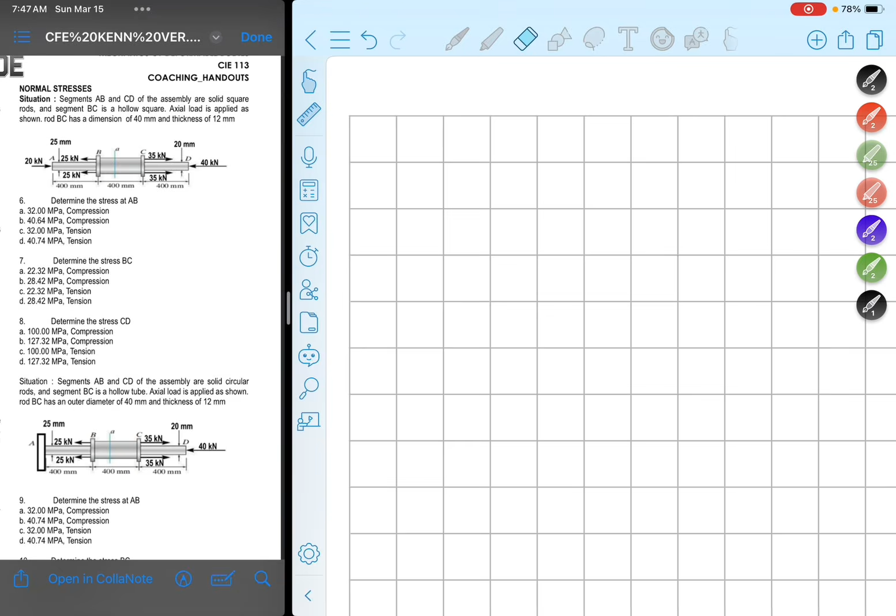Okay, basahin natin. Segments AB and CD of the assembly are square solid rods and segment BC is a hollow square. Axial load is applied as shown. Rod BC has a dimension of 40 mm and thickness of 12 mm. Pagkayari mo magbasa ng tanong, ito ang tip ko sa inyo.

Pagkayari nyo magbasa ng situation problems, yung binasa ko kanina, the first thing that you're going to do is basahin mo muna yung tanong. Yung mga tatlong tanong, nakasunod yung situation na yun, kasi para alam mo kung paano siya i-approach. Time saving kasi, if alam mo agad kung ano hinahanap, hindi yung kung ano-ano pa yung gagawin mo, di ba?

May situational problems, guys, na minsan nandun na yung sagot, hindi mo binasa yung tanong, kaya hindi mo alam kaya ginawa mo muna kung ano-ano muna. Hindi ko naman pala kailangan ng ganyan, hindi ko naman pala kailangan ng ganito, bakit ko siya hinanap? Kasi hindi mo alam kung ano ba yung totoong hinahanap dun sa problem.

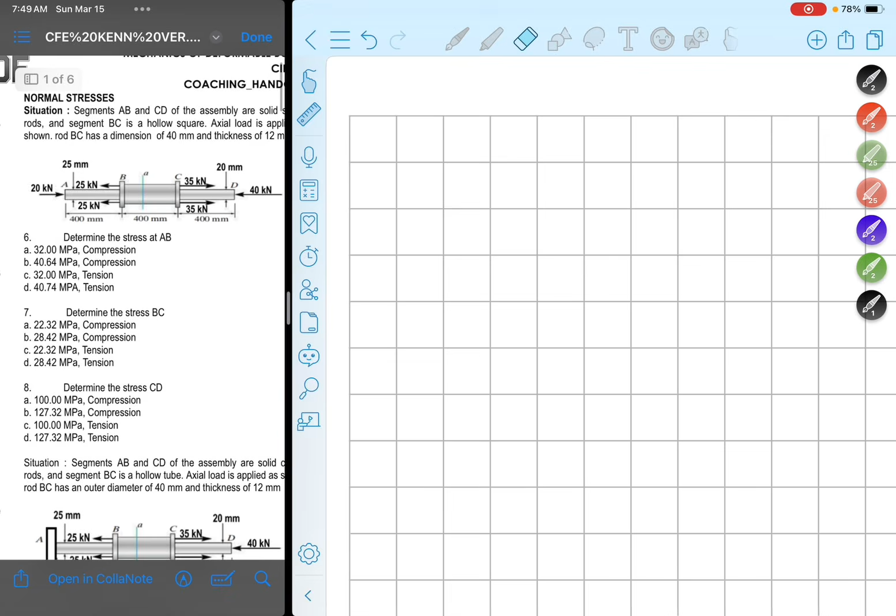So after mong basa ng situation, basahin mo yung problem. Ang sabi, determine the stress at AB. Determine the stress at BC. And determine the stress at CD. So technically guys, hinahanap sa atin yung stress.

Okay, for situation number 1, hinahanap sa atin yung stress. Generally, ano ba yung formula ng stress? Tingnan mo muna, balik ka dun sa situation. Ang sabi dyan, axial load is applied. Ibig sabihin ng axial load guys, that the load is applied towards or perpendicular to the cross-sectional area. Ibig sabihin, normal stress yung hinahanap natin. Kung ganun pala, if normal stress yung hinahanap, ano yung formula for the normal stress? Simply, normal stress is equal to force over the area.

At kapag gaganyan, hanapin nyo muna yung mga parameters. Ano yung P? Diba force yun? Ano yung A? Yung area. Mamili ka, isipin mo muna yung dalawa, siguro force muna.

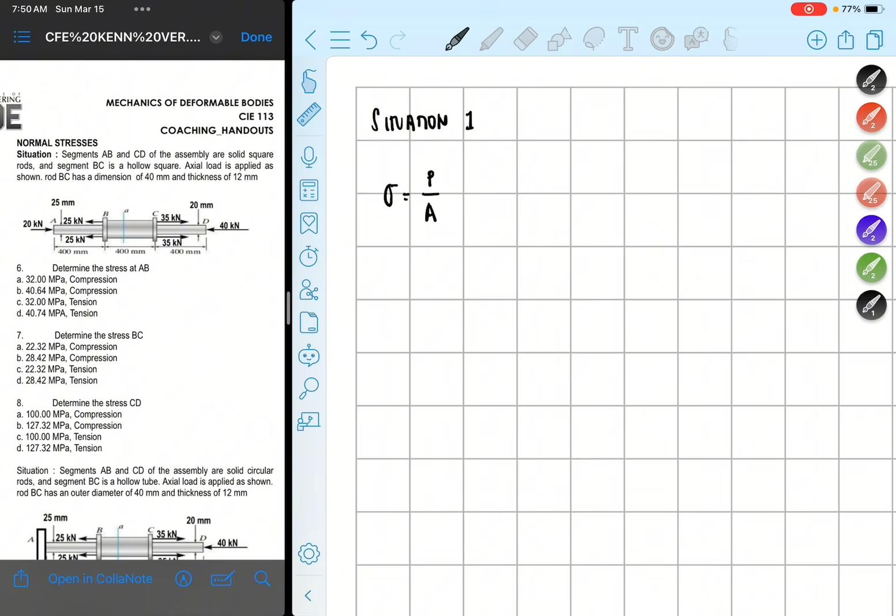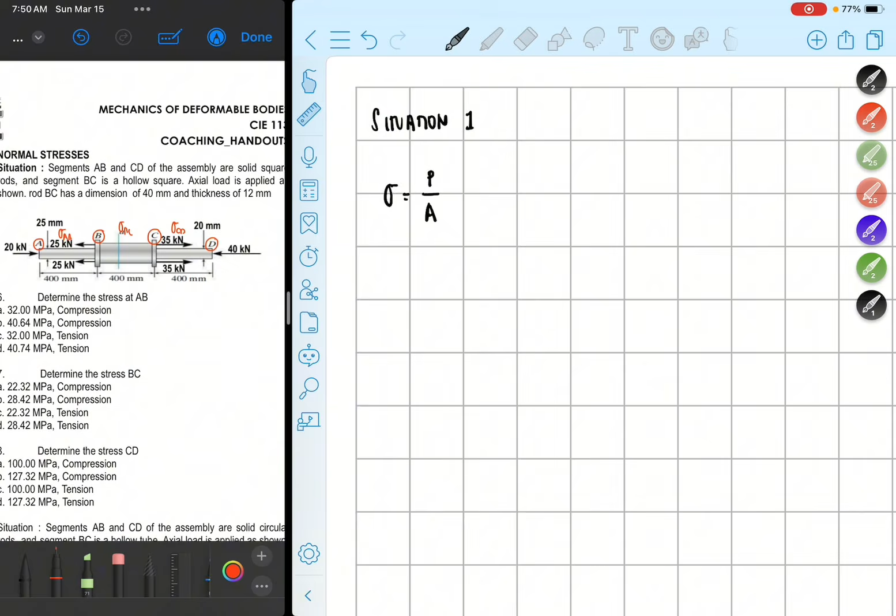In this case, hinahanap sa atin yung segment AB, segment BC, and for the last one, segment CD. So technically, yung stress dito stress AB, dito stress BC, and yung pinakadulo is stress CD. Ibig sabihin, kailangan mo yung force AB at saka yung area AB. Dito naman, kailangan mo yung force BC at saka area BC. At para dito naman, kailangan mo yung force CD at saka area CD.

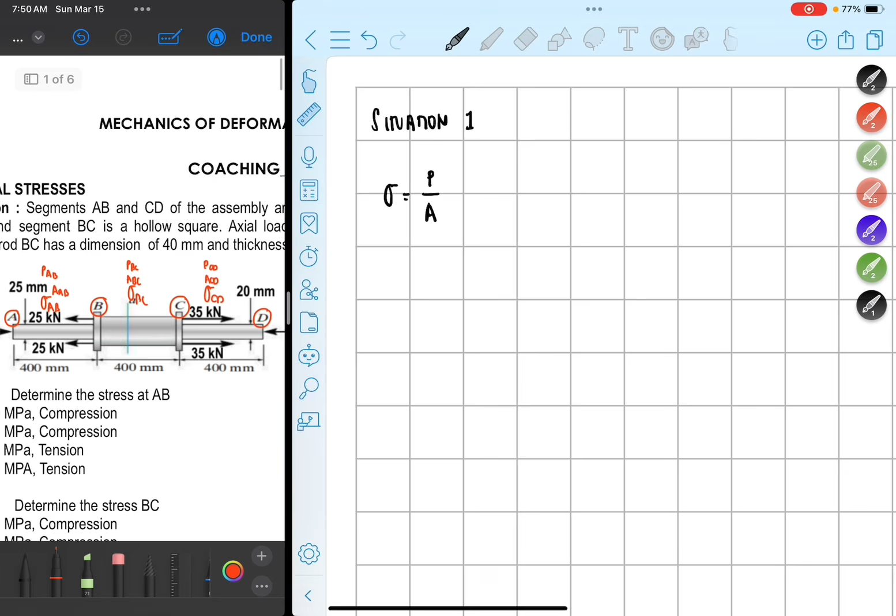So in this case guys, yun yung mga kailangan mong hanapin. Okay, so paano ba natin mapapalitaw yung force AB muna? For example, we're going to discuss we're going to get the forces muna. Pag forces guys yung hinahanap, di ba, those forces are internal forces. Meaning, hindi yung sisingaw, kung hindi, puputulin. Okay? In this case guys, the most efficient way to identify the forces is by cutting the cross section.

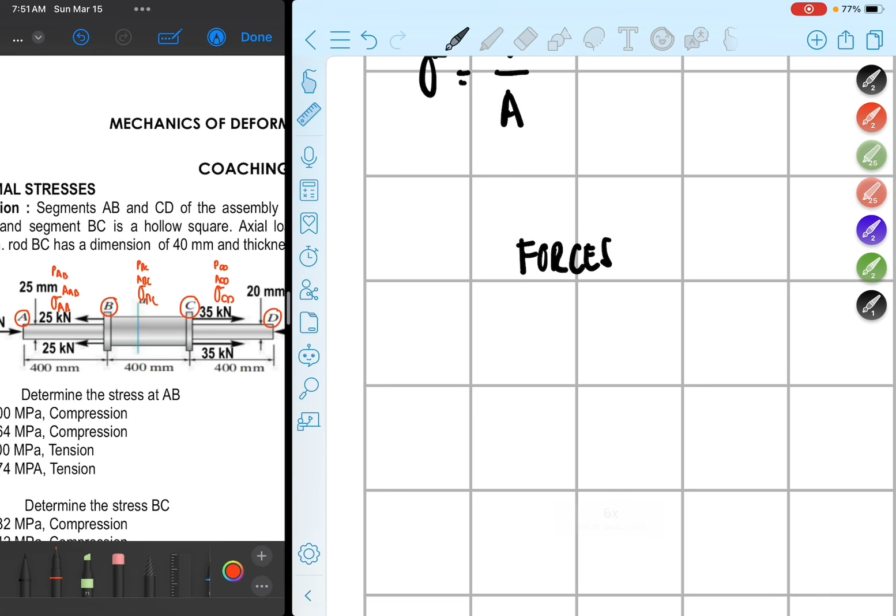Okay, so yun. Ibig sabihin, kailangan nating i-cut yung cross section natin. So ibig sabihin, need natin iputulin. Okay, so ibig sabihin, yung for segment AB, kailangan natin siyang putulin. Okay, kung puputulin natin yan, hindi ba this will be your segment AB. Okay, so this will be your segment AB. Putol na yan. Okay, putol na yung cross section natin na yan.

Kung mapapansin nyo, for segment AB, meron tayong, pag pinutol mo tong portion na to, di ba ito ipuputulin mo dyan, ito yung ginawa ko. Ayan, pinutol mo yan, ibig sabihin ng force lang napapasok dyan is, wait lang. Di ba, ang force lang napapasok dyan is ito, which is 20 kilonewton.

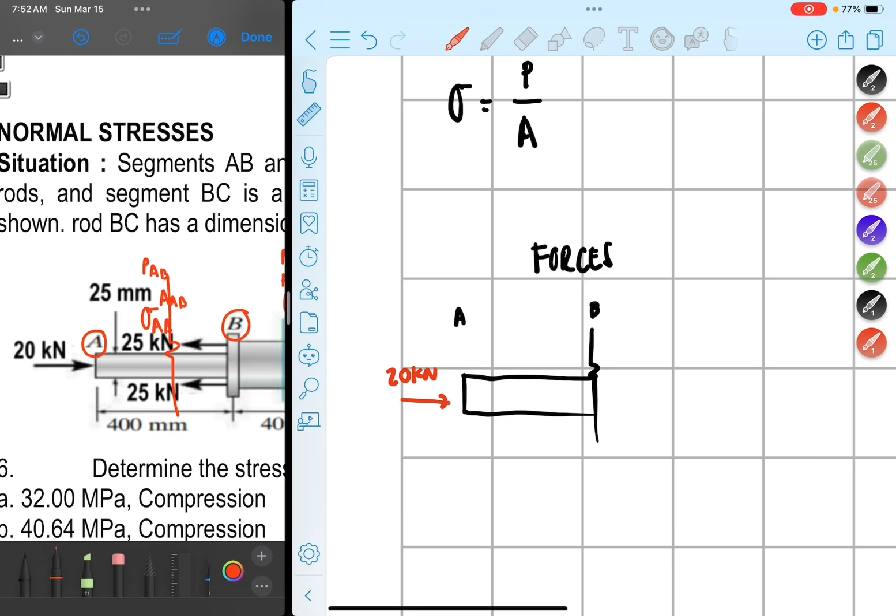Ngayon, para makuha mo yung force AB, okay, by the way guys, yung force AB na sinasabi ko dito, okay, yung force BC natin, okay, yung force BC natin dito is kung ano ba yung isisingaw nung pagkakaputol mo. Yun kasi guys yung internal reaction to the external forces. Meaning, kung meron kang 20 kilonewton doon, hindi mo na siguro kailangan mag-assume kung ano ba yung direction ng internal force. Diba, in every action, there's an equal and opposite reaction para dun sa may forces ng mga reactions natin.

So, I believe, pag ganyan yung ating PAB. Okay? Dito ko na lang gagawin siguro yon, but taking the summation of forces along the x-axis naman yan, di ba? Which is equal to 0. 0 to the right positive tayo dito. 0 is equal to 20 minus PAB. So technically, yung PAB natin is equal to 20 kilonewton.

So make sure guys na i-indicate yung unit kasi may mga times na kailangan natin convert yan. Pagka bumubuo tayo ng equation, meron instances na parang, kumbaga, may mga instances na meron tayong internal forces pa. So, basta mamaya, siguro meron ba tayo example doon? I think meron naman. O kung wala, siguro idadagdag ko na lang siya. But yun, wag yun lang basta kakalimutan yung mga units natin. So, ibig sabihin, the force AB is 20 kilonewton.

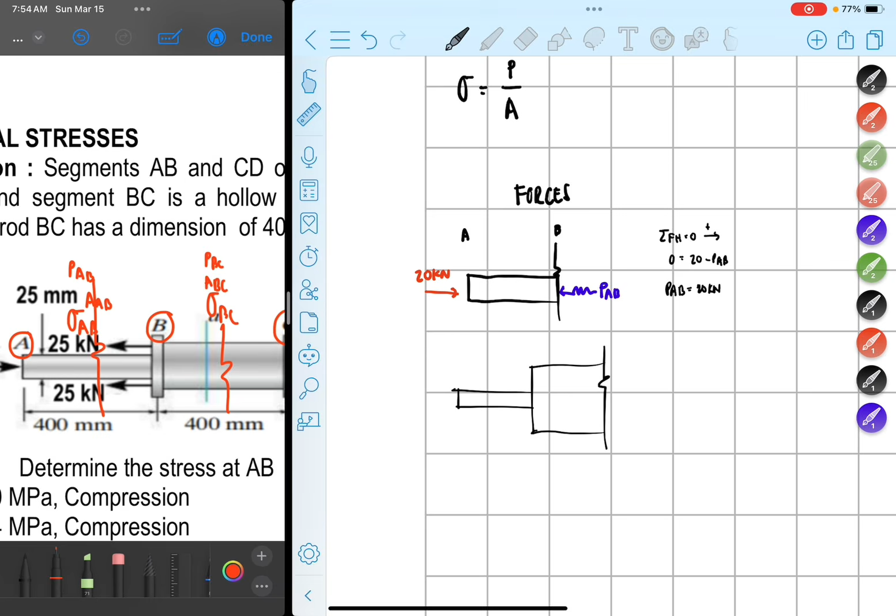So, wag muna natin yung siguro i-diretso na natin ng segment BC. Kung puputulin mo naman itong segment BC, di ba ganyan yan? Okay? Putulin na natin siya. So, ulitin ko lang. Ito buo na to. Take note guys, buo na yan. Ito naman yung puputulin natin. Okay? So, technically, this will be your A, this will be your B, and this will be your C.

Okay? So, ngayon, isulat mo ulit yung mga forces. Okay? In this case, meron tayo dito. In this case, we have 20 kilonewton. And then, meron tayong 25 kilonewton na pumupul dito. Okay, this is 25 kN. And then, we have 25 kN.

At lagi nyo guys tatandaan na yung 25 tsaka 25 kilonewton na yan is applied along or across the cross section. Pero wala siya sa gitna. Meaning nakapabilog kasi yung 25 na yan. O kaya naman, dalawang point dito sa may cross section natin dito, diyan ina-apply yung 25 kilonewton.

And take note guys, that yung 25 kilonewton na yan is hindi yan, kumbaga, hindi pa yan yung resultant natin na force na nag-a-act sa cross section na yan. Tama? Kasi guys, kailangan along this line of action bago ka magkaroon ng summation ng forces mo. Tama? So, di ba nagsasummation tayo ng forces? So, hindi mo pwedeng pag-plusin yung dalawa na yan unless kunin mo yung resultant nung dalawang force natin. In this case, guys, okay? In this case, guys, okay? In this case, kukunin mo yung resultant nung dalawa na yan.

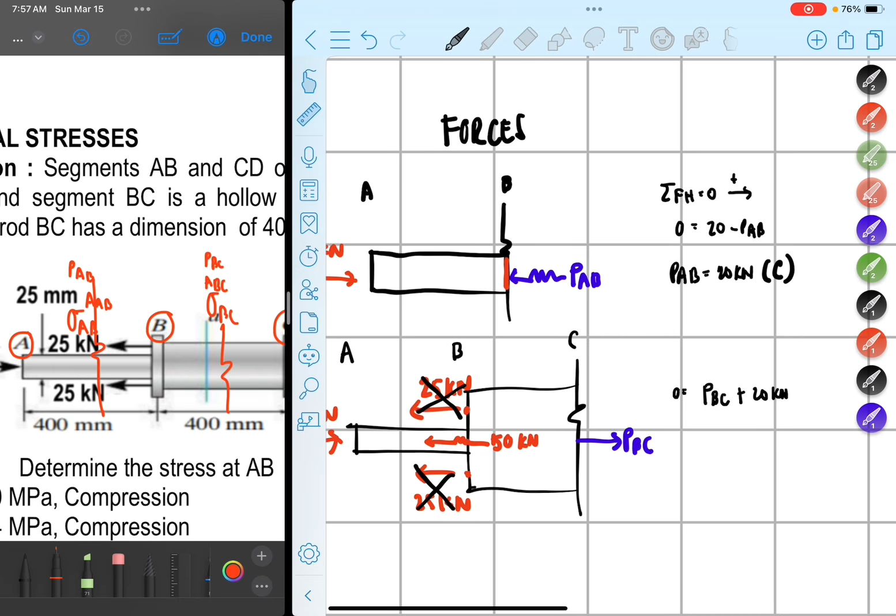So taking the summation of forces, let's go straight. We have 0 equals PBC, to the right is positive, plus 20 kN, minus 50 kN. So in this case, our PBC equals 30 kN.

But make sure guys, that 30 kN, you know what direction it is. Is it tension or compression? If you look, this is our cross-sectional area. Our force is away from the cross-sectional area. Therefore, this is tension, meaning it pulls that portion.

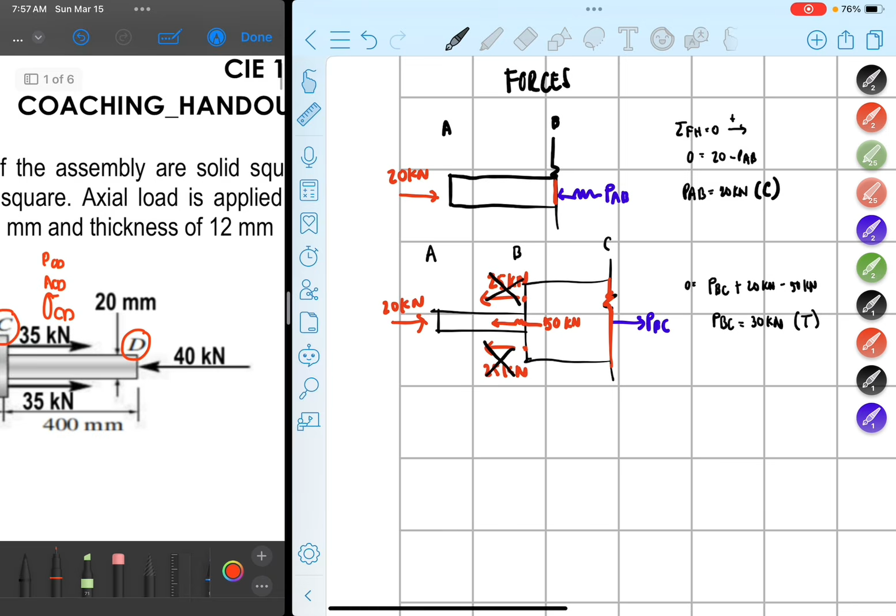Our cutting plane is like this. Okay, so this is D, this is C. If you have 40 kN here, if you have 40 kN there, what now is the internal force PCD, to equal that 40 kN.

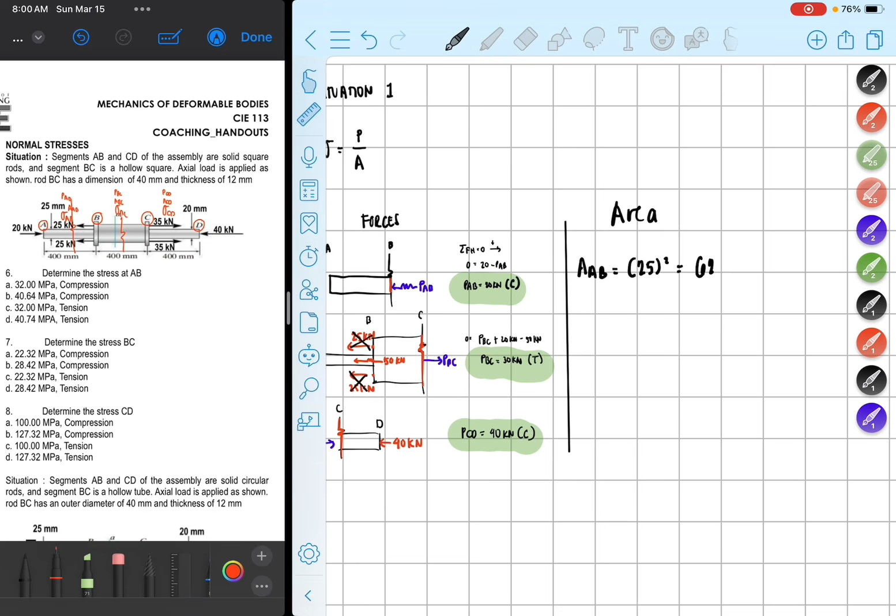Since we're still on the solid squares, because it says solid squares for AB and CD. So here we go to the area of CD. This equals 20 squared, which equals 400. Okay, so we have 400.

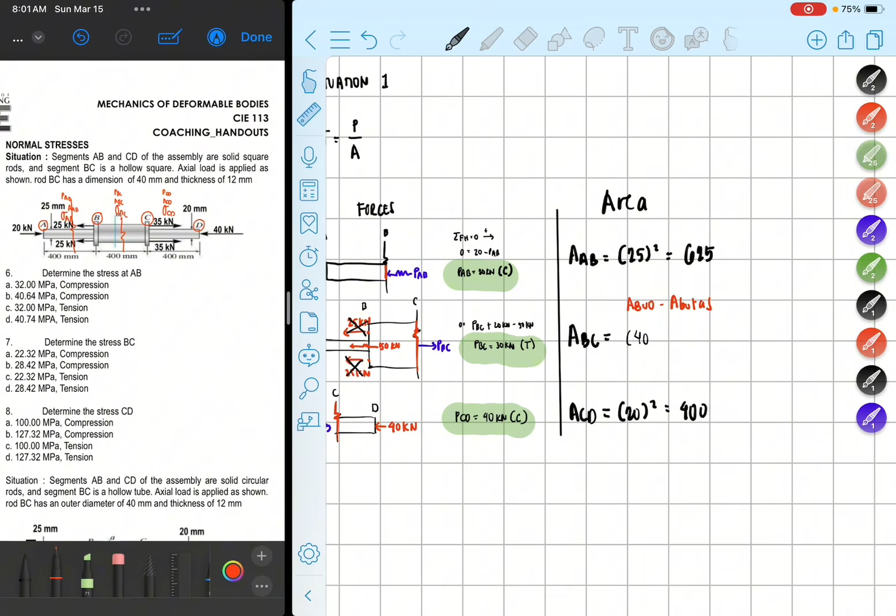So, the thickness is 12. That means 12 on this side and 12 on this side too. It works both ways since this is tubular, a tube. So if this is 40, how much is the inner portion? 40 minus 12 on the left, minus 12 again on the right, gives us 16. So the inner dimension is 16, the outer dimension is 40. Since it's square, it works both sides.

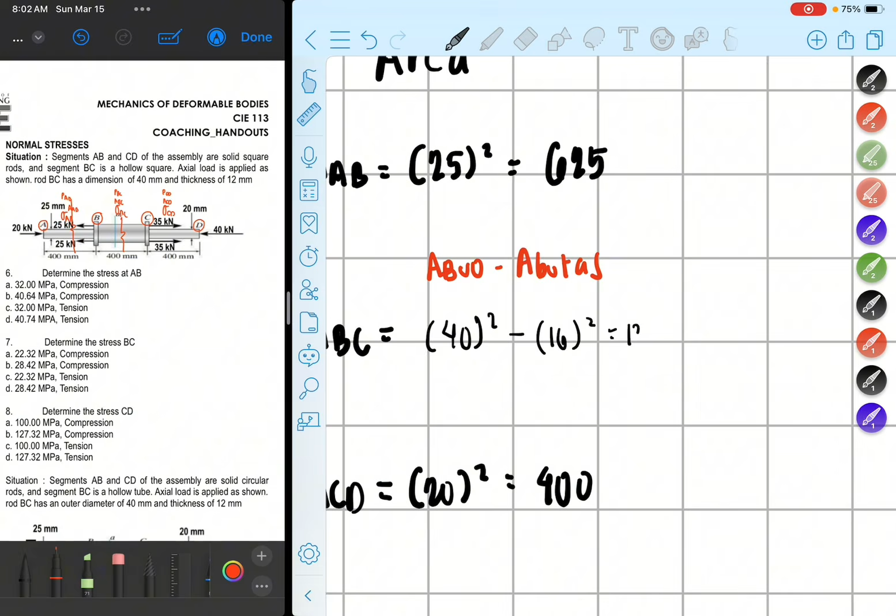So this is 16 square. We have 40 square minus 16 square. This equals 1344.

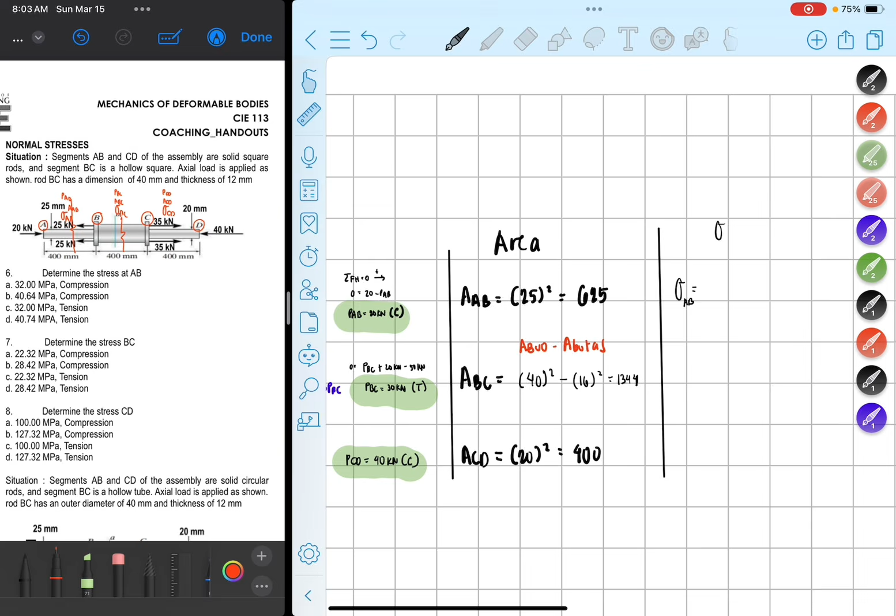Let's deduct for the stresses. For stress AB, you have 20 kN compression force at 625 area. So this is equal to 20 times 10 raised to 3, converting kilonewton to Newton, since our choices are in MPa, Newton per millimeter square. That's another way for you to identify if what we're doing is correct.

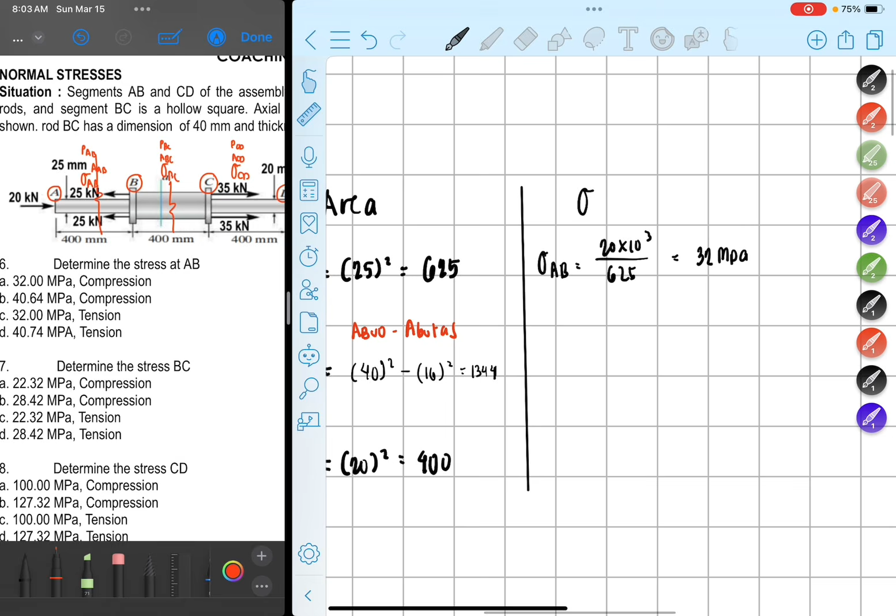So, AB is equal to 20 times 10 raised to 3 over the area of 625. How much is that? 20 times 10 raised to 3 over 625, giving us 32 MPa. The first thing your eye sees, unfortunately, is letter C, which is 32 MPa tension.

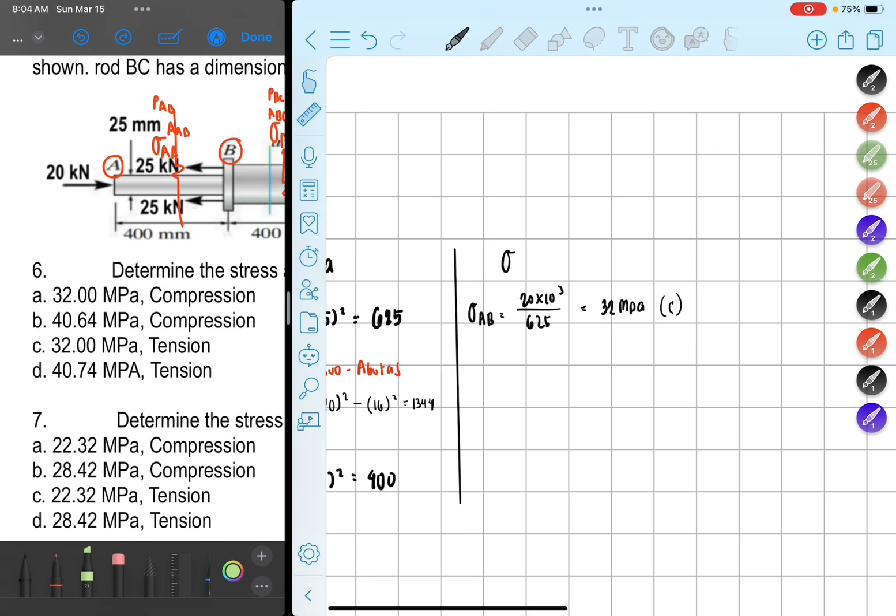So this is BC. What's the force for BC? You have 30 times 10 raised to 3. What's the area? 1344. This equals 30 times 10 raised to 3 over 1344, which equals 22.32 MPa. And check again, this is tension.

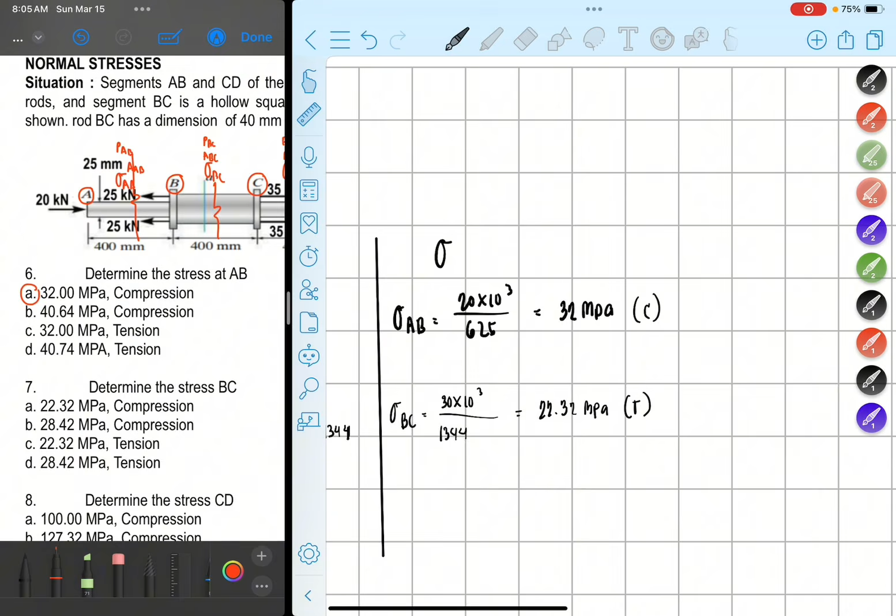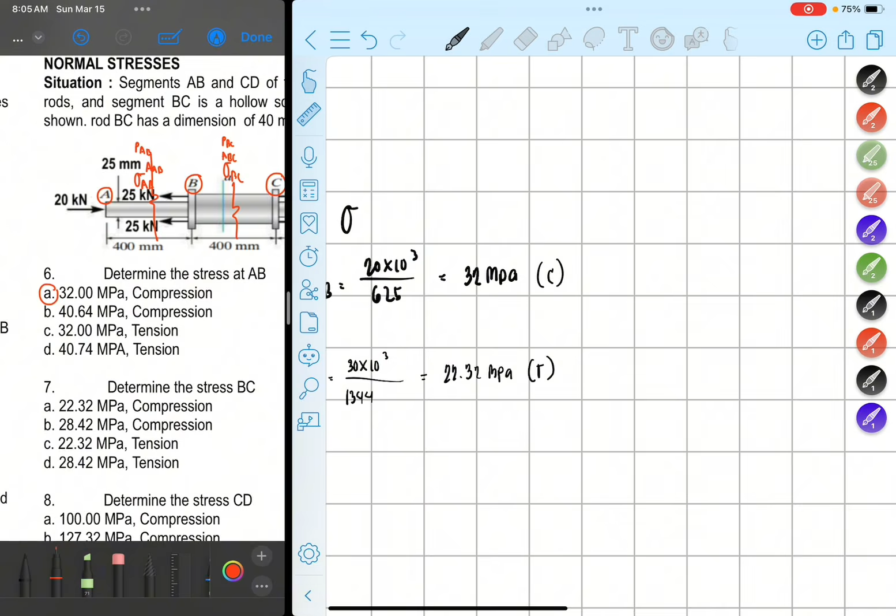It says hollow square, but let's try it anyway. By the way, the answer for number 7 is 22.32 tension, which is letter C. Now, what I considered was circular.

If it's circular, if this is 40, this is 16, right? So this is 16. The area I computed, the stress, since we have 30 times 10 raised to 3 here, the area, since it's circular, is pi outer diameter square over 4 minus pi inner diameter square over 4. Compute that, guys.

Let's compute. We have 30 times 10 raised to 3 over pi times 40 square over 4 minus pi times 16 square over 4. The result is 28.42. If that's what you thought of first, you'd be so hyped to circle letter D, 28.42 tension, as your answer.

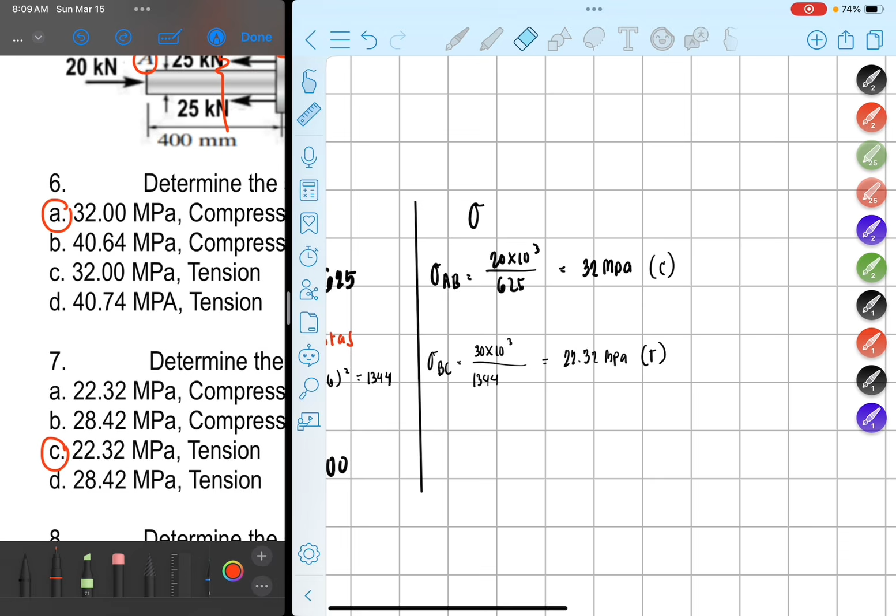So in this case, ang sagot is 22.32 MPa. That's the correct answer. Anyway, next is for letter CD.

Okay, for the stress ng CD, this is equal to, we have 40 times 10 raised to 3. And we have 400. So this is equal to 400 times 10 raised to 3 over 400. By the way, kaya ako siya times 10 raised to 3. It is because, wait lang - 400 niya, sorry that's 40 lang pala. 40 times 10 raised to 3 over 400. So we have 100 MPa.

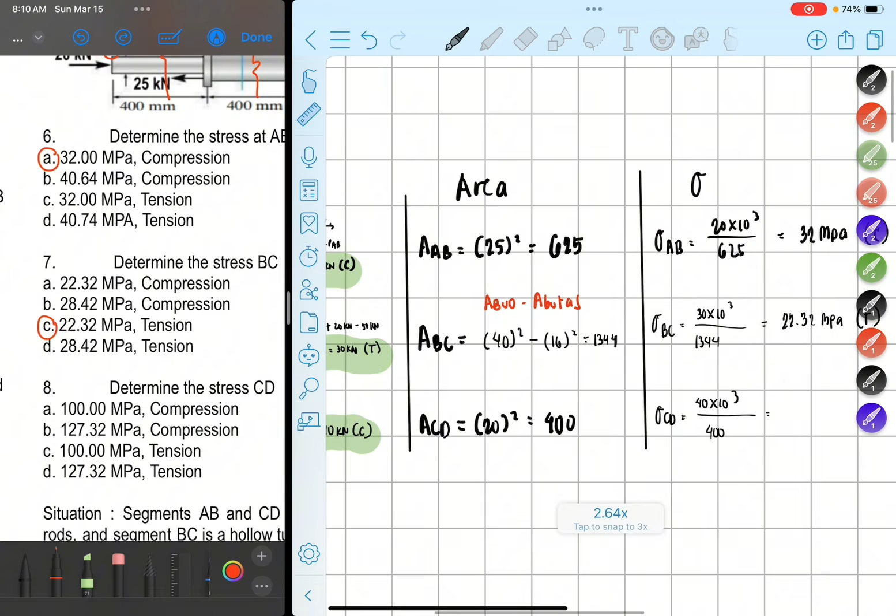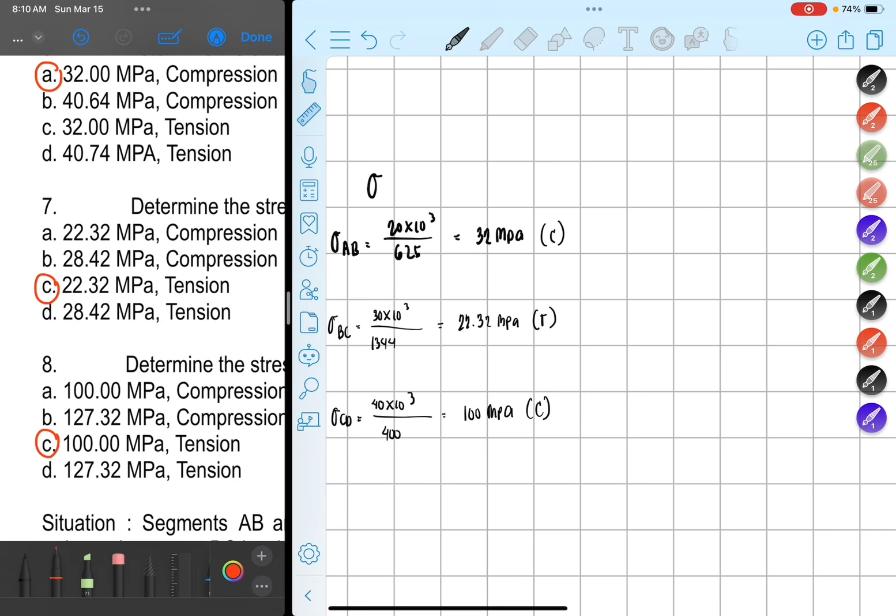By the way, this is compression ulit, so titingnan mo compression yan. Ang sagot natin for this one is 100 MPa tension, letter C - 100 MPa tension, letter C. Sorry, namali pa, 100 MPa compression pala. Okay, yan sagot, 32 MPa compression.

Bago ka mag-proceed sa next problem, check mo ulit yung sagot mo. You have 32 MPa compression, 22.32 MPa tension, at 100 MPa compression. So in this case guys, hindi ka na mai-stress kung tama ba yung nasulat mo, nabilugan mo, or na-shade mo etc. Pwede ka na mag-proceed. So let's proceed to the next problem.

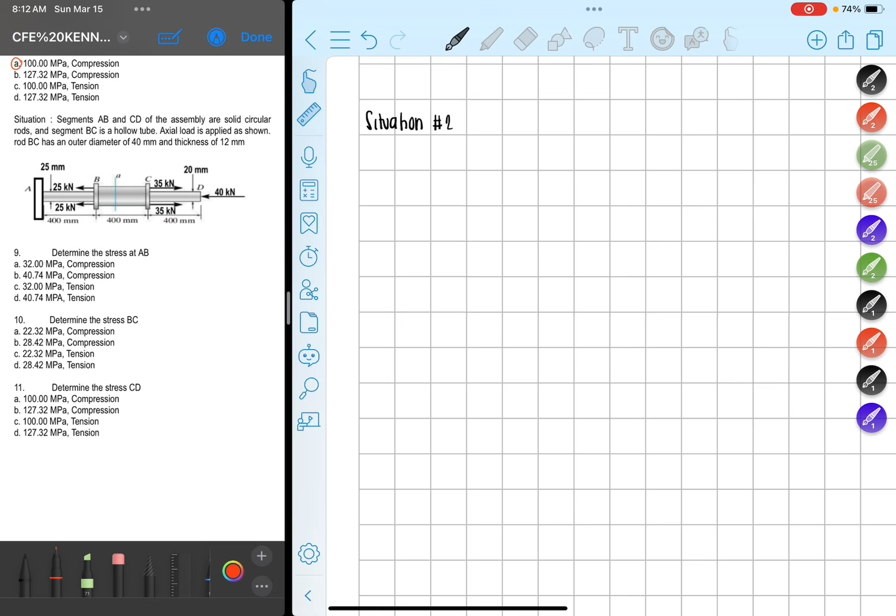So guys, starting here on, medyo tips na lang talaga ibibigay ko. Na-discuss ko naman kanina on how to paano mamili ng tamang mga values. So balik tayo dun sa analysis natin. Dito ko na lang siguro isusulat para hindi rin time consuming, mahaba masyado yung video natin. Ano pa ba isang way or method para ma-identify natin ng mabuti kung ano ba yung mga forces na included?

Pag nakakita kayo ng ganito, this is determinate naman. Kasi kung titingnan nyo, isa lang naman dito guys yung walang support. Pag ganun, ibig sabihin solvable pa rin siya by equilibrium equation. Pag nakakita kayo ng support na ganyan, technically kakalito na yan di ba? Unless simulan mo sa kanan, mag from right to left ka. In this case siguro mag from right to left na lang tayo. Pero kung hindi, sige gawin na nga natin left to right na lang, baka kasi yun dun kayo masanay.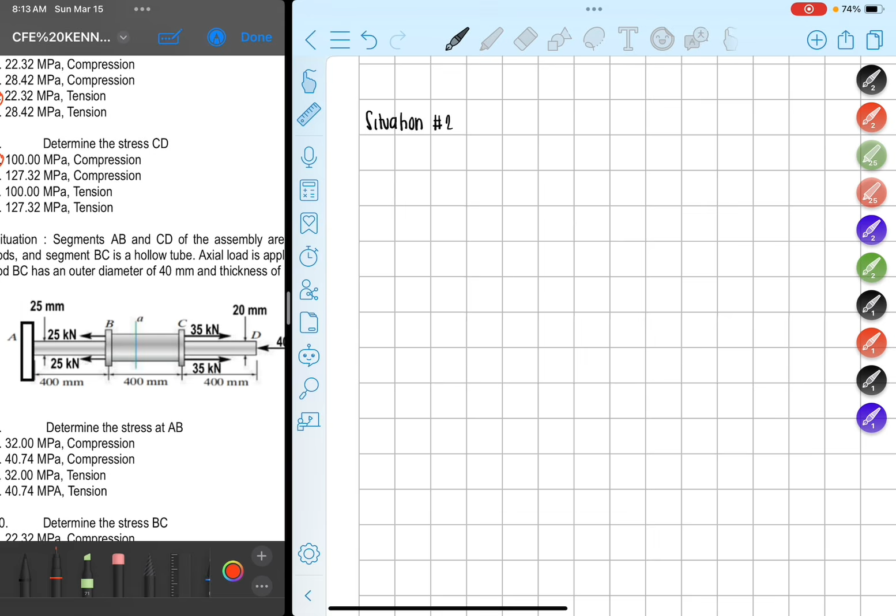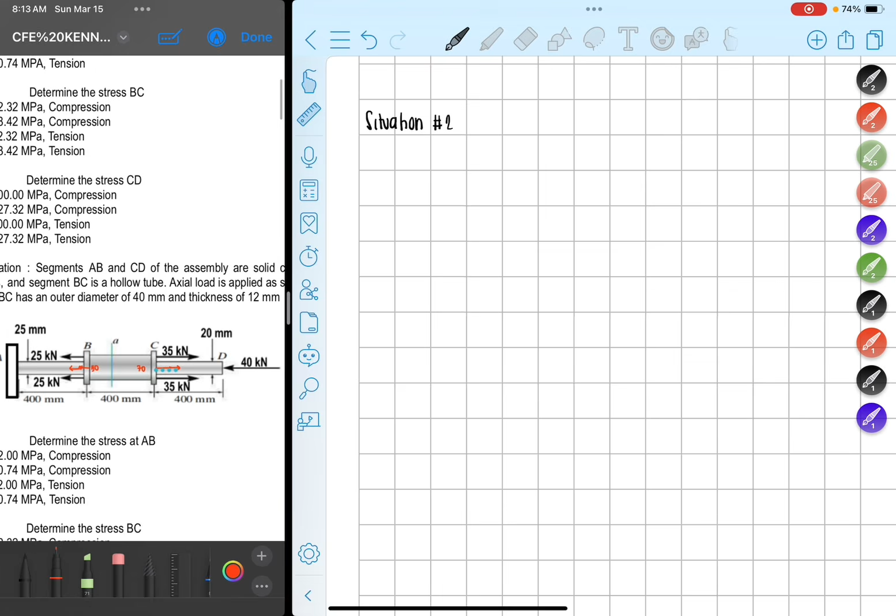Kung titingnan nyo mabuti, we have this steel rod. Ngayon yung A na yan, magkakaroon yan ng reaction kasi fixed yan. Ano ngayon yung magiging reaction ng A na yan? Ibig sabihin kailangan mong isolve yung reaction, dalawa. Kunin natin to guys - this is 50, sorry, yan this is 50. And this is 70. So meron kang 50 na pakaliwa, 70 na pakanan, at 40 na papunta ulit sa kaliwa. So tingnan mo mabuti para hindi ka na mag-summation forces.

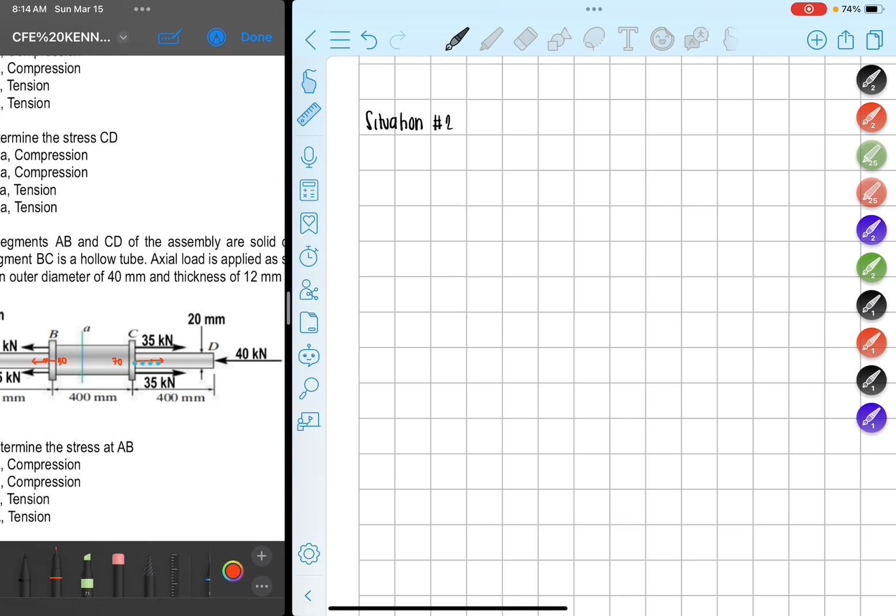Tingnan mo 40 plus 50, diba 90? Ano mas malaki, 90 o 70? Di 90. Ibig sabihin si 70 yung nangangailangan. So based on the direction ng 70, kailangan niya ng katulong papunta rin sa kanan. Tama? So kung papunta sa kanan yan, may undo dito.

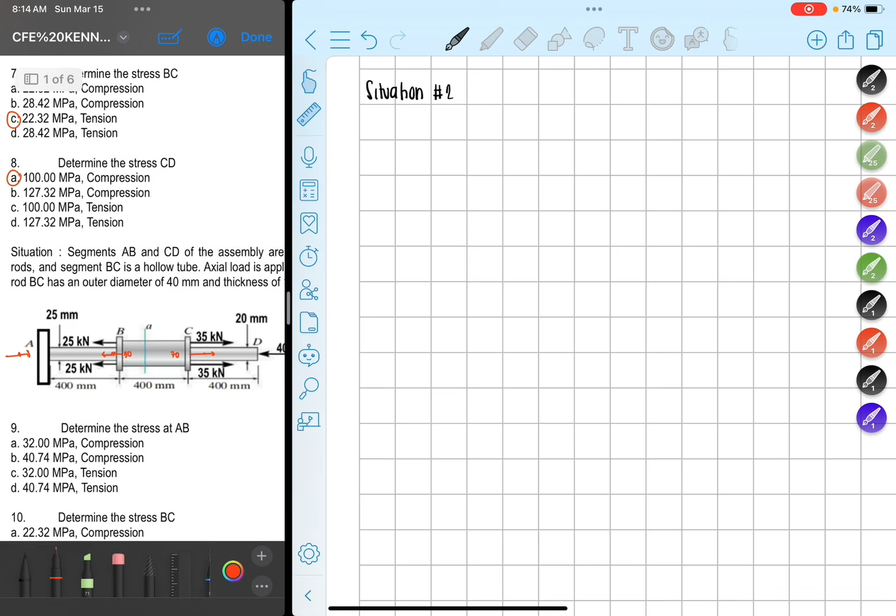Okay, kung papunta sa kanan, ito ngayon yung magnitude. Tama? So you have 90 na pakaliwa, you have 70 na pakanan. Ilan yung kailangan ni 70 para ma-equal niya yung 90? O di kailangan pa niya ng 20 kilonewton. So hindi mo na kailangan talaga mag-summation of forces horizontal.

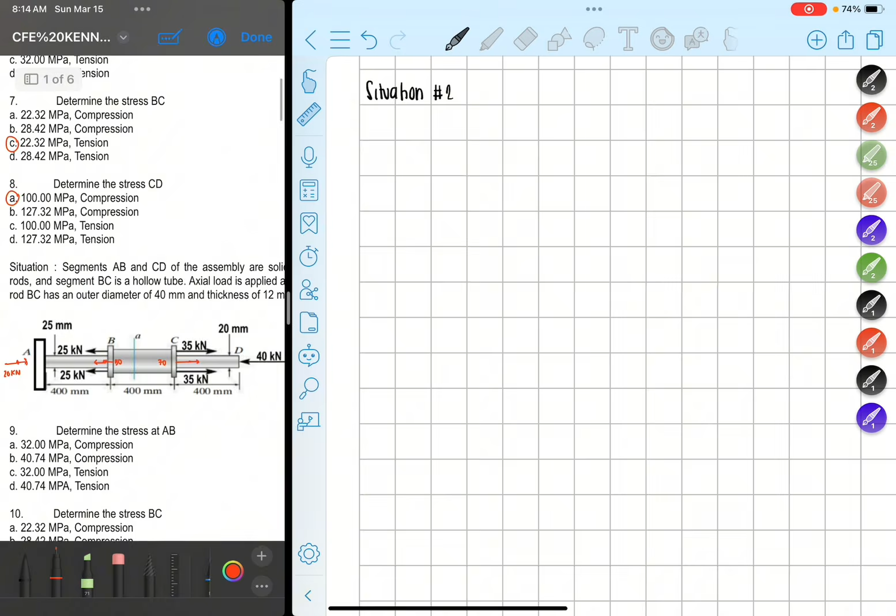Pero para mas ma-sure ka, gawin mo pa rin. Tingnan mo, para ma-sure, 20 plus 70 is equal to 90. Tama? And then 50 plus 40 is equal to 90 din. So ibig sabihin, in equilibrium na sila.

Ngayon hatiin mo. Now in this case, hatiin natin ito. Ganyan na lang siguro. Ngayon, ang force na kailangan mong i-consider dyan, eto lang, yung mga forces mo lang dun sa papuntang kaliwa kasi naka from left to right tayo, di ba? Saan ba yung dito? Okay, kasi undo.

Okay, ano yung mga forces na yun? Ibig sabihin, ang mga forces na yun, ayan lang titingnan mo. Pinutol mong ganyan. O ano yung forces ngayon doon? So meron ka lang 20 kilonewton. Anong direction? 20 kilonewton is papunta sa kanan. Therefore, ang kailangan mong 20 kilonewton ngayon for this segment AB ay ang punta sa kaliwa. So this is 20 kilonewton, sulat mo na lang din. This is compression.

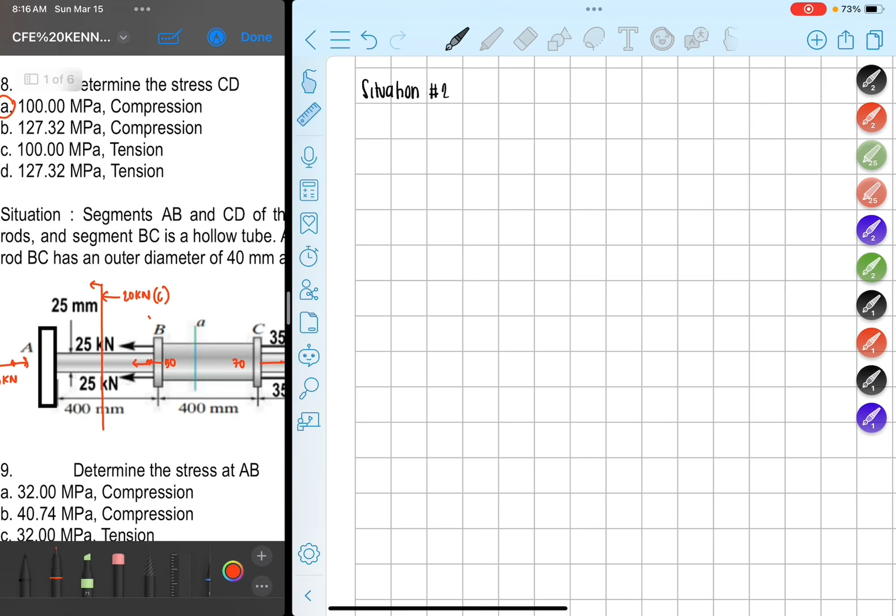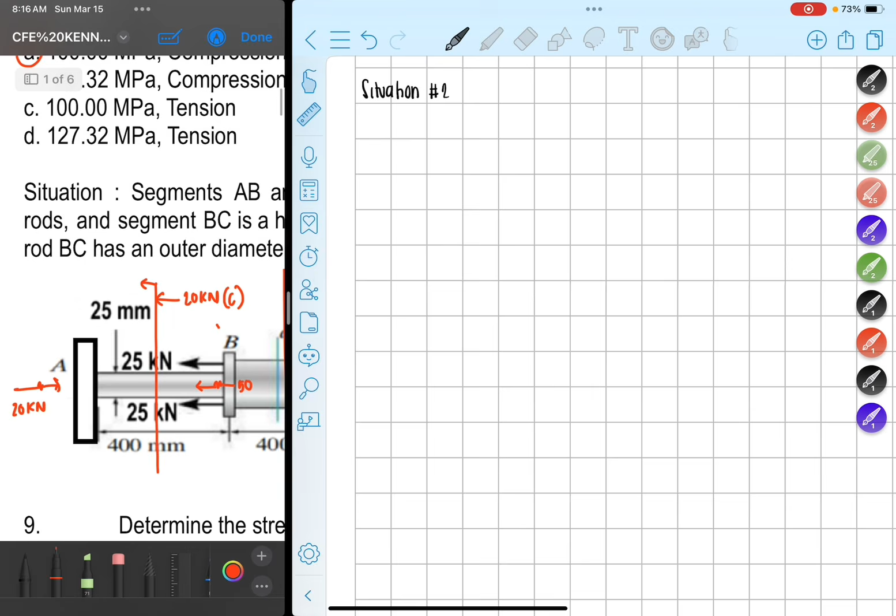Okay, next, hatiin naman natin ito. Ang mga forces na involved naman dito is yung ating 50 kilonewton tapos yung 20 kilonewton. 50 pakaliwa at 20 pakanan. Sino mas maliit? Yung pakanan. Ibig sabihin kailangan niya ng katulong. So kung 50 yan, ilan pa yung kailangan ni 20 para ma-equal si 50? There we have 30 kilonewton. In this case guys, away from the cross-sectional area, this is tension.

Okay, next, para sa last, hatiin natin ito ngayon. Sige, consider pa natin from left to right. Ano ngayon yung mga forces na involved doon? So in this case, ang forces na involved, ayan na yun. You have 20 kilonewton, 50 kilonewton, at saka 70 kilonewton. Meron kang 20 kilonewton pakanan, 50 kilonewton pakaliwa, at 70 kilonewton pakanan ulit.

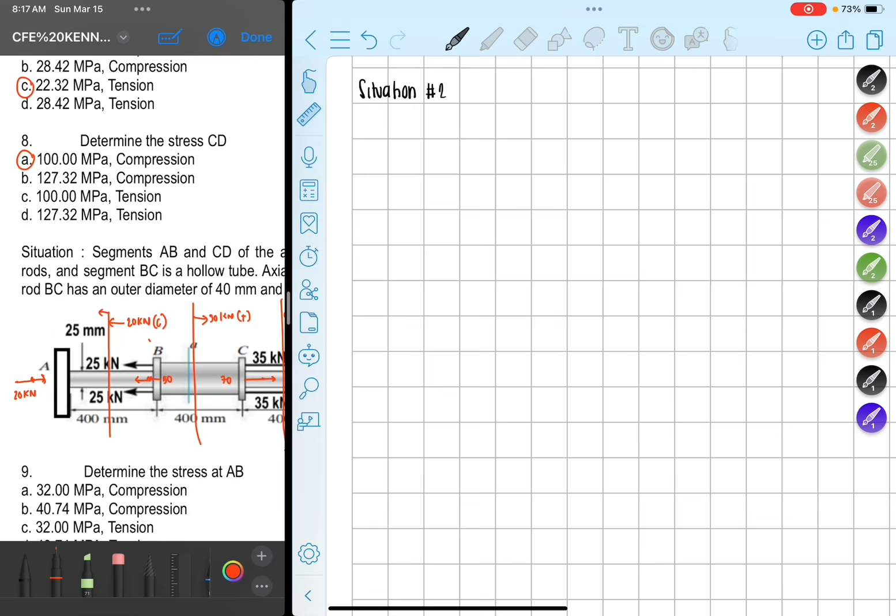Kung titingnan mo, 20 plus 70 na pakanan is 90. Tapos 50 na pakaliwa. Sino mas maliit? Si 50. Ilan pa kailangan ni 50 para ma-equal niya yung 90 na pakanan? Mas maliit siya, ibig sabihin siya yung nangangailangan ng tulong at kailangan ng same direction. Ilan yung magnitude na kailangan niya? 20 plus 70 na pakanan is 90. So ibig sabihin, kailangan pa ni 50 kilonewton ng katulong na pakaliwang 40 kilonewton. In this case, this is compression.

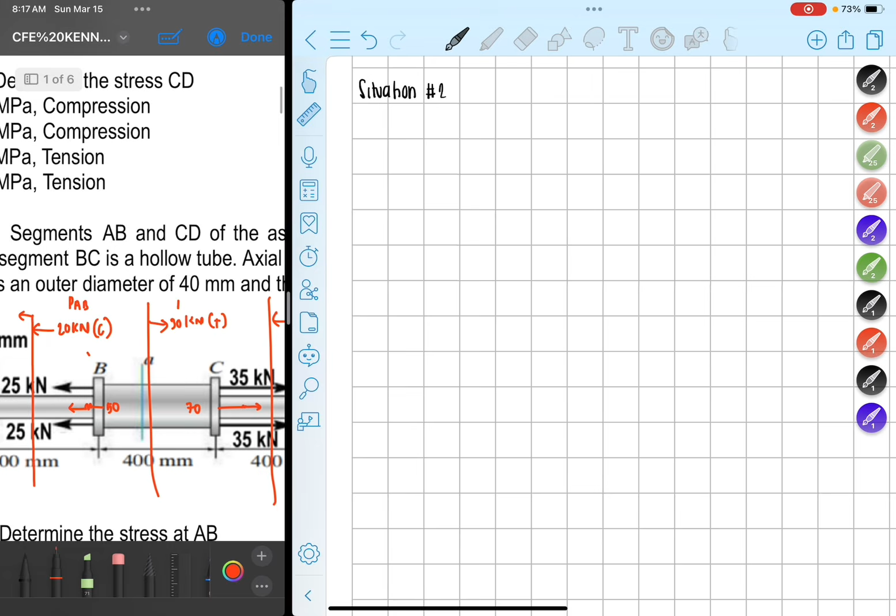Ngayon, okay, so yun na guys. This is force ng AB, this is force ng BC, tsaka this is force ng CD. O, yan yung mga forces natin. At for situation 2, ang hinahanap sa atin is stress ng AB, BC, at CD ulit. So in this case, irekta na siguro natin siya.

Okay, for number 9. Okay by the way, this is 6, 7, 8, ano? 6, 7, 8. Para isi-save ko yung solution pag ano.

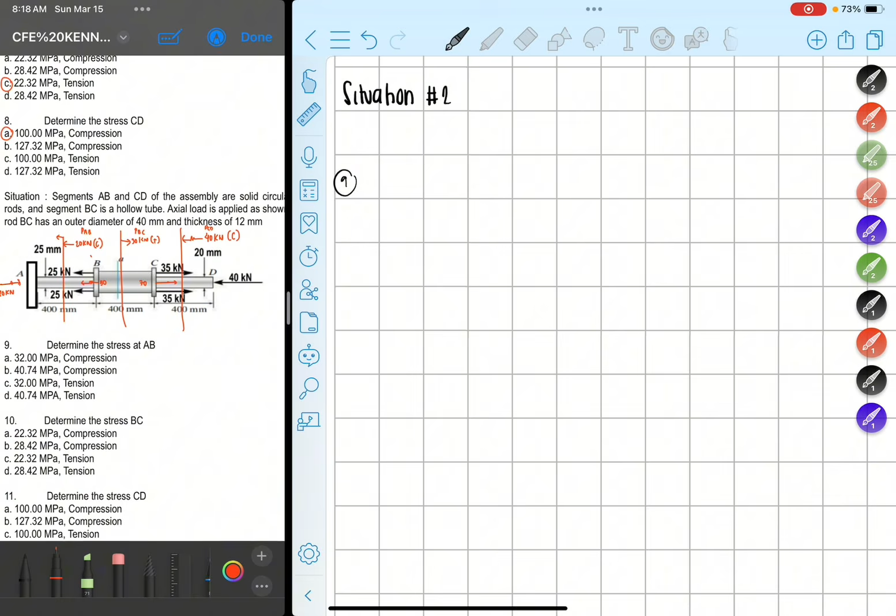So for number 9, ang sabi is for situation 2, determine the stress AB. Ibig sabihin, kailangan nating i-identify. Basahin niyo ulit yung per area. Meron ka ng force, di ba? Meron ka ng force sa AB na 20 times 10 raised to 3. Ilan yung area? Solid circular rods. Ibig sabihin, solid circular rods, hollow? Hindi, solid nga, ibig sabihin walang butas. Ganun, ilan yung diameter? We have 25 mm square.

So paano yun? Pi 25 square, area of circle over 4. So this is equal to, for AB, we have 20 times 10 raised to 3, and then pi 25 square over 4. So this is equal to 40.74 MPa. Bumalik ka sa choices.

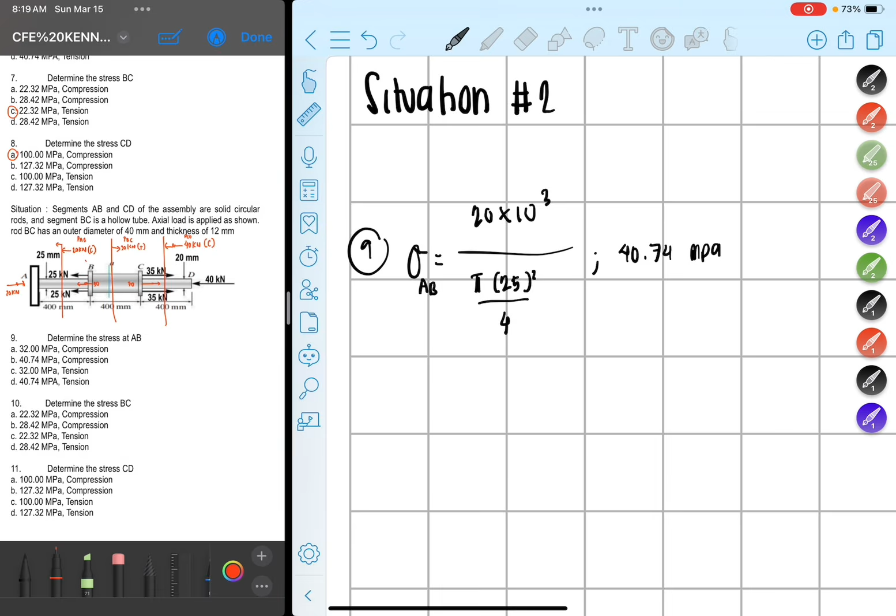Tingnan mo, may dalawang 40.74 dyan. Tingnan mo yung condition, is it compression or tension? Balik ka ngayon doon sa force na na-compute mo. So ang PAB natin is 20 kilonewton compression. Technically, this is compression. Okay, may natin bilugan para ma-sure pa ulit.

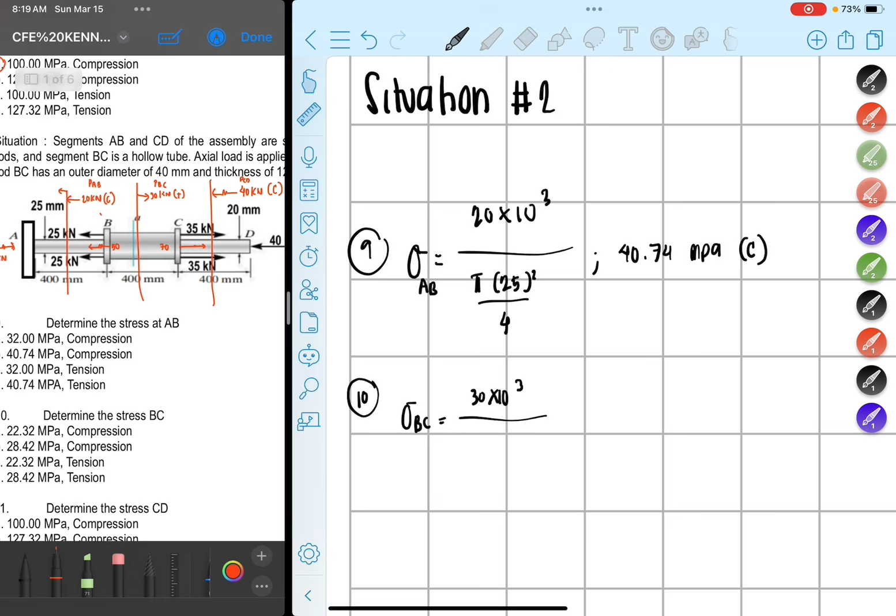For number 10, for BC naman, ano yung force natin sa BC? Ang force natin sa BC is 30 kilonewton. So 30 times 10 raised to 3. At yung BC natin guys, ang sabi sa BC is a hollow tube, meaning butas. Ngayon, tingnan mo, rod BC has an outer diameter of 40 mm and thickness of 12 mm. Yun pa lang yung ginawa ko kanina. Okay, sabihin, ang area na ito, okay, ang inner diameter nun, yung kaninang ginawa ko, 16, di ba? O para sa skip nomi dyan, yung mga mahilig mag-skip.

O, tingnan nyo mabuti yung kanina. Bilog yun, kaya 40, tapos may bilog dito. Since 12 both sides, 12 dito pareho, ilan yung natitira dito? Di 16 yan. Okay, yun lang naman yun.

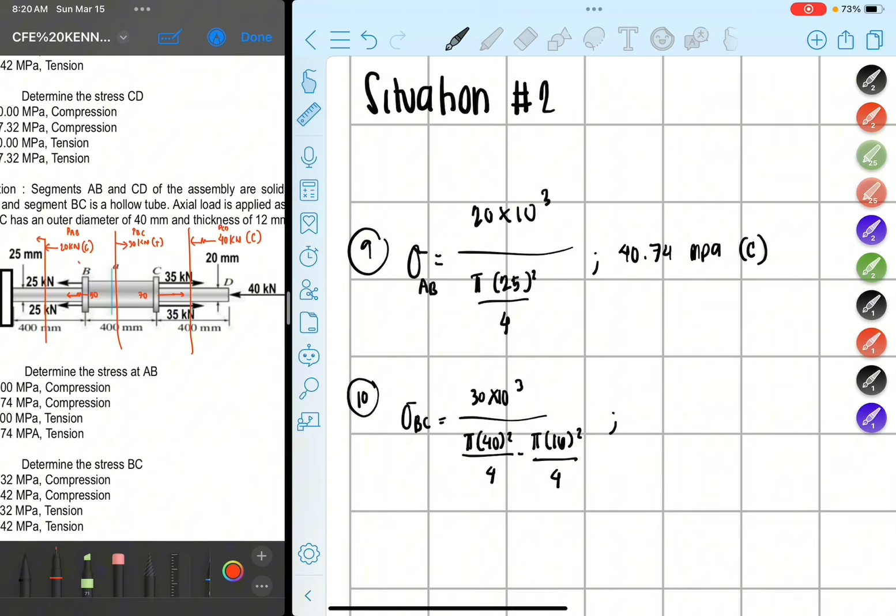So this is pi 40 square over 4 buo minus butas na pi 16 square over 4. So this is 30 times 10 raised to 3 over, we have pi 40 square over 4 minus pi 16 square over 4. So in this case we have 28.42. Dito pa lang sagot na yun, we have 28.42.

MPa. So, tension or compression? Kung titingnan mo yung force mo, this is tension. Okay? Now, if number 11, okay, dito naman sa stress ni CD, this is equal to, we have

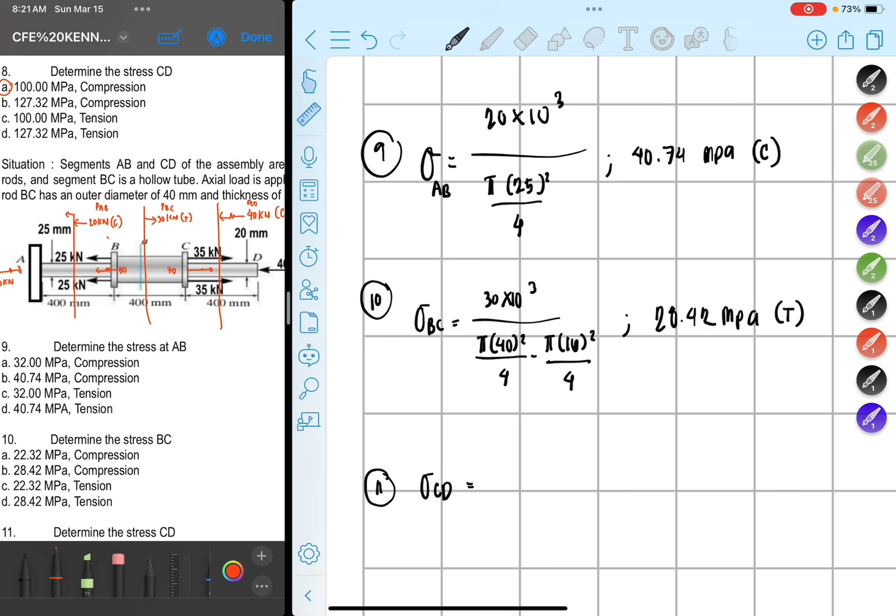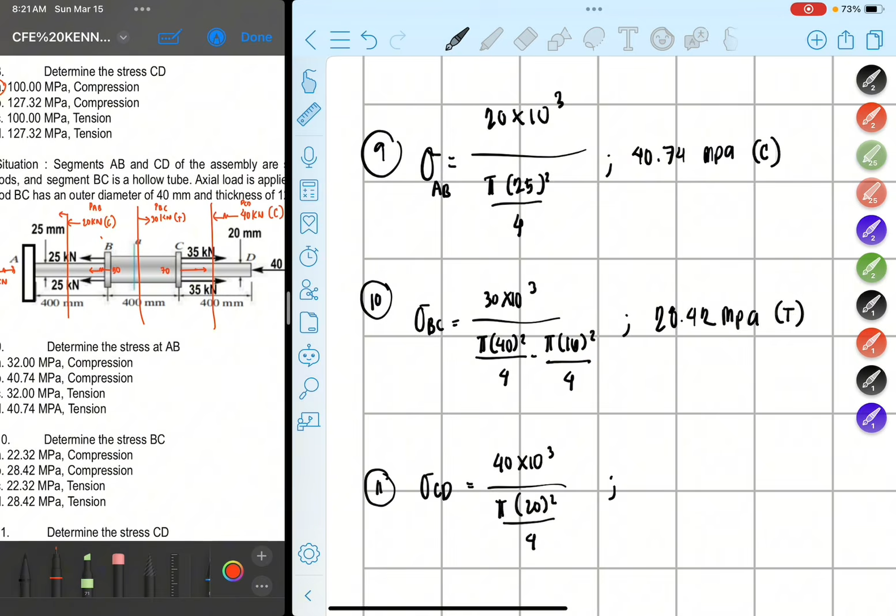Stress for CD, we have 40 kilonewton, so 40 times 10 raised to 3. Ano yung area niya? We have pi, solid yan, we have 20 square over 4. So in this case we have 40 times 10 raised to 3 over pi 20 square over 4. We have ilan? 127.32. So we have 127.32

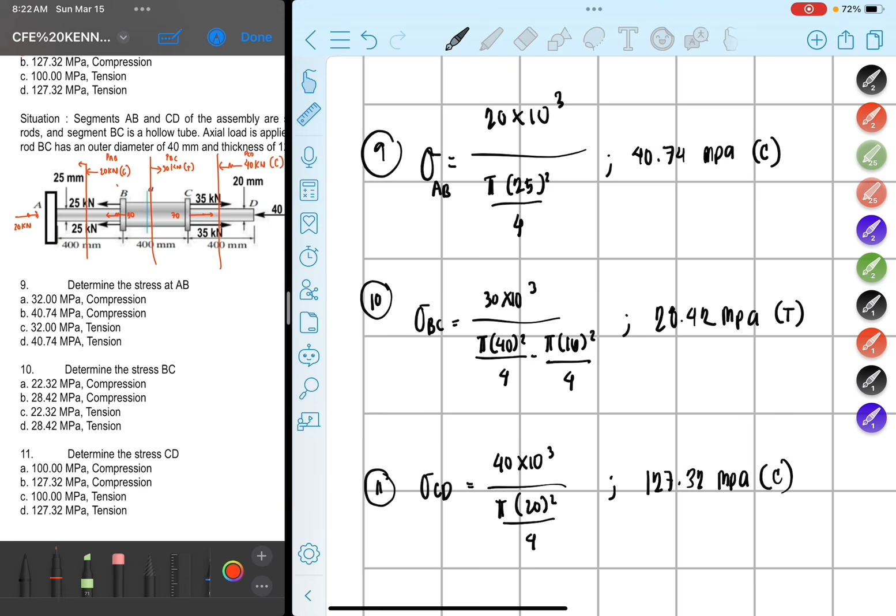MPa. So in this case, this is compression. Okay, so ayun na. So we have 40.74 compression for 9. For number 10 is 28.42 MPa tension and 127.32 compression for number 11.

So bilugan mo na. Ayun, no? Congratulations. This is letter B. Tama. Number 10 is 28.42 tension, so this is letter D. And for 11 is 127.32 MPa compression, this is letter B.

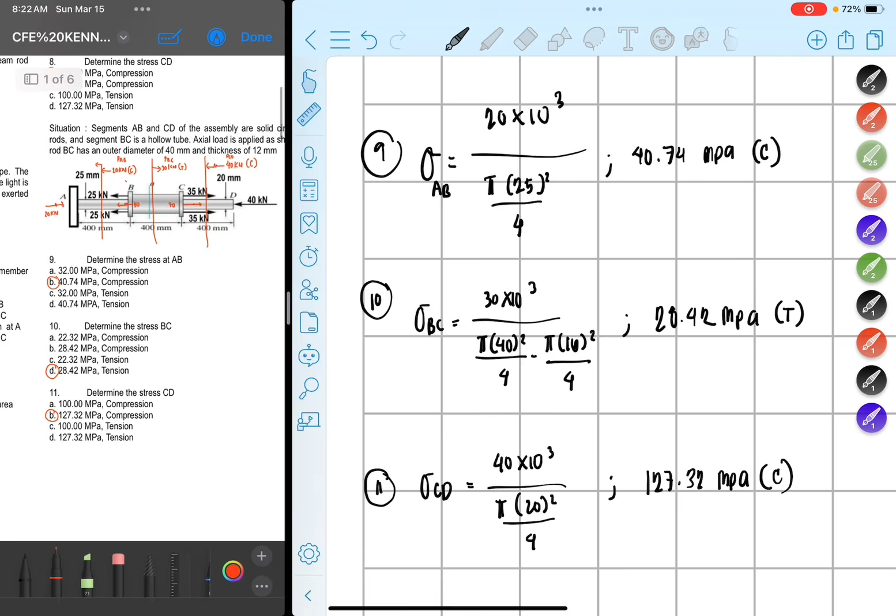So that's for situation number 2 or problem number 2 natin. And hello guys, for situation number 3, ito naman tayo. Okay, sa truss, paano naman natin i-apply yan sa truss? So determine the normal stress in members CD, HI, and CH of the truss and state if the members are in tension or compression. If the area is 120 inches square, that's the area of the cross section.

Asan ba yun? Di ba ang CD natin is eto? Asan pa? CD, ano sabi? CD, IH o HI, CD, saka CH. Di ba yung mga hinahanap sa atin? So technically, ayan yung mga nasa midsection.

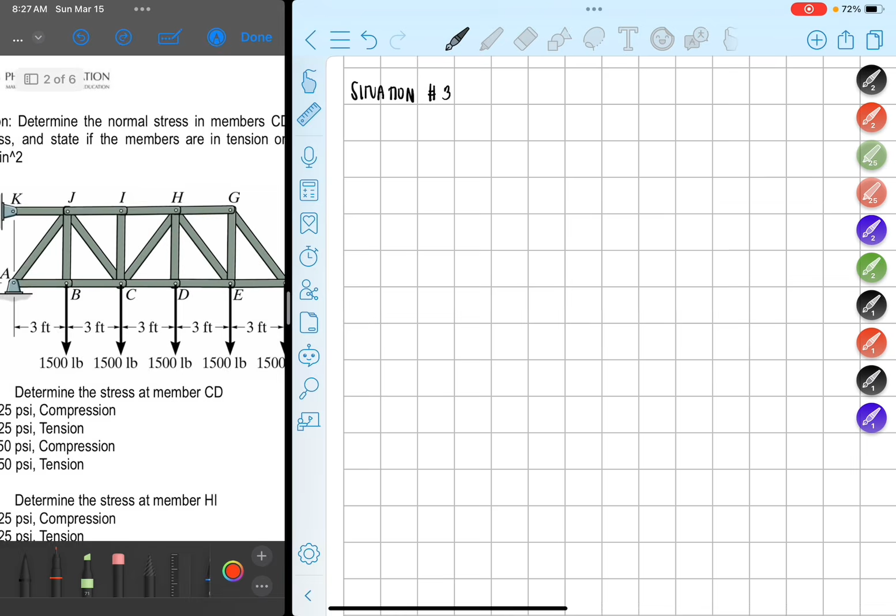So in this case, okay, pwede ka na siguro mag-method of section. Paano ba yun? Putulin mo yan. Okay? And then ano mas madali consider? Yung nasa kanan o yung nasa kaliwa. Take note guys, na kung i-consider mo yung nasa kaliwa, kailangan mo muna mag-solve ng reaction forces for A at saka sa K. Tama? Wala naman problema yun kung yun yung mas trip mong gawin sa buhay.

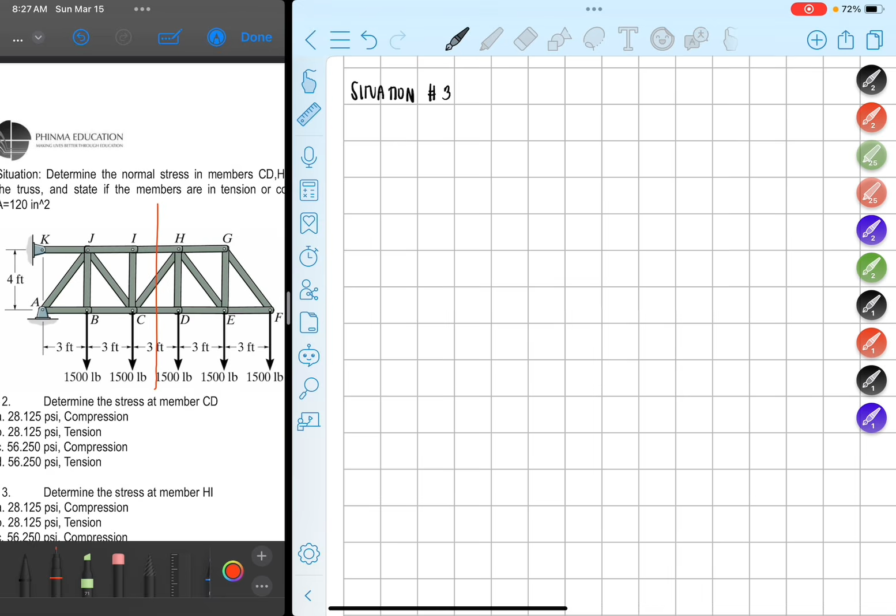But guys, the method of section hindi naman siya usually nire-require kung anong section yung gagamitin mo. Is it the left section or the right section? It is kung ano ba yung pinaka-most convenient. Yun ang pinaka-ano. So in this case, siguro i-consider na natin itong kanan. Review na rin to para sa method of section.

At di ba guys, ang rule natin o ang ginagawa natin nun, hindi man siya rule, okay? Ang practice lang natin before, pag ganyan, since naputol tong mga cross section na to, di ba may sisingaw diyan? At by practice, ina-assume natin na lahat yan ay tension. Ito ba naputol ba yan? Of course hindi mo naman dinaanan yun ng cut eh. Ito yung naputol. Okay, so lahat yan ay tension.

Ina-assume natin as tension. Paano? Pagka nag-negative, of course mali yung assumption mo. Mali assumption natin, magko-compression yan. But ang idea is, pag namali, wag nyo muna siyang itatama. Okay, wag nyo muna siyang itatama. Ang gawin nyo is ituloy-tuloy nyo lang hanggang ma-solve nyo lahat ng hinahanap nyo ng mga, ano ba tawag dito?

Ng mga forces, mga internal forces, dun sa cut na yun. Wag nyo muna siyang itama. Kasi yung sign na gagamitin nyo, kailangan, yun pa rin yung sign na ipa-plug in nyo doon sa next equation na gagawin nyo, doon sa may cut na yun. Okay, pero ayun siguro, panoorin nyo na lang siguro. Meron naman ako doon, I think meron ako atang concept for method of section. For statics ko before. So ayun, i-browse nyo na lang sa YouTube channel ko siguro.

Hanapin nyo na lang siya if nakakalimutan nyo pa rin yung method of section. So ayun, yan yung cut natin. So definitely, this is your HI, this is CH, and this is CD. Okay, di ba ano ba yung rule natin? Kasi tatlong forces yan, so technically hindi ka pwedeng mag-moment dyan kasi concurrent yung force system na kino-consider mo dyan.

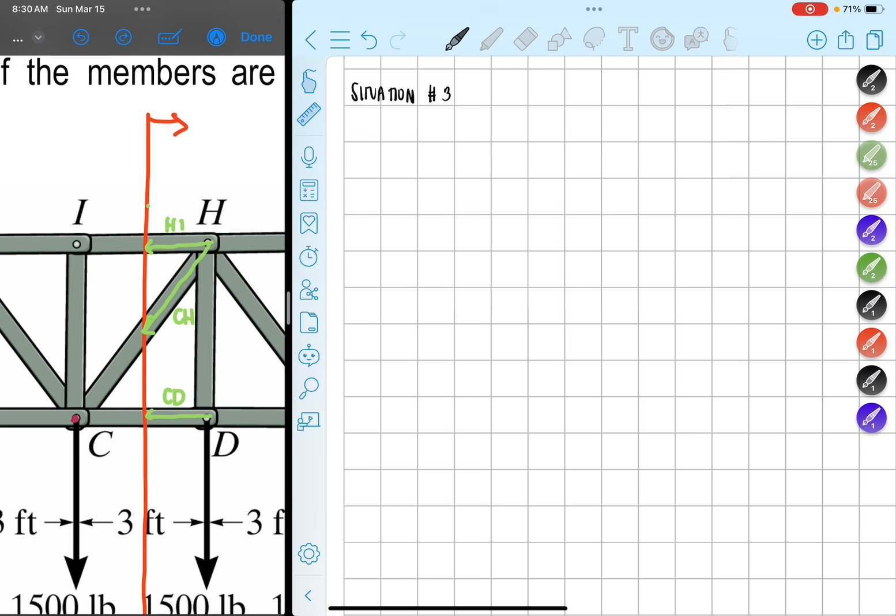Dito, kasi dyan magka-pass through to, tsaka yung CD natin. So if we're going to take the moment, dito tayo mag-solution. Summation of moment at C, considering clockwise positive, this is equal to 0.

Ano yung mga forces dyan? Lakihan natin, lahat yan kasama. Unahin natin si CD saka si CH. Since dadaan sila sa point of concurrency natin, ang point to consider natin is C, mananalify niyan yung effect ng forces na yon. Ang lilitaw na lang sa atin dyan is HI muna. From C, yung HI natin is iikot siya counterclockwise, itong portion na to, iikot yan na pag ganun, from C.

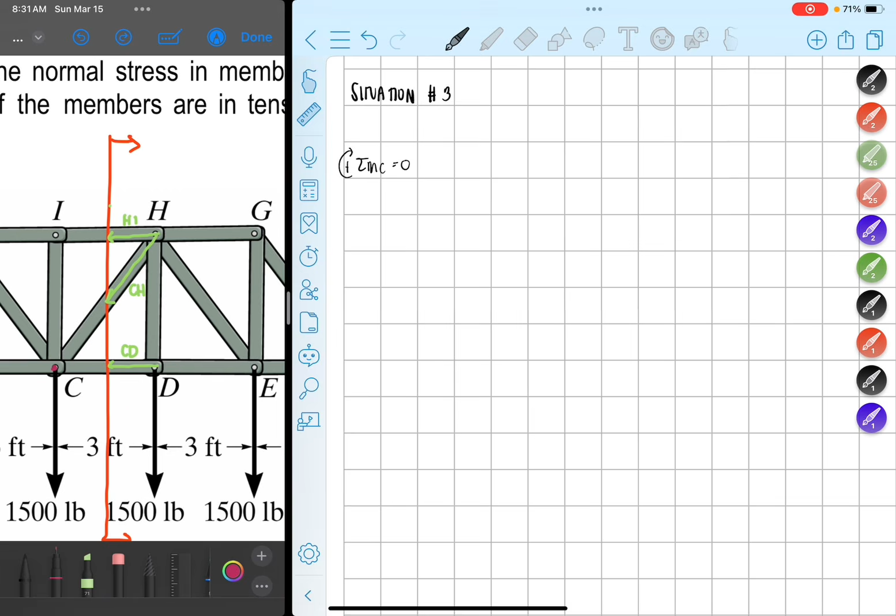So from C, we have HI. 0 is equal to negative HI, multiplied by ilan yung perpendicular distance niya. Ang perpendicular distance ni HI natin ay 4 feet, so we have 4.

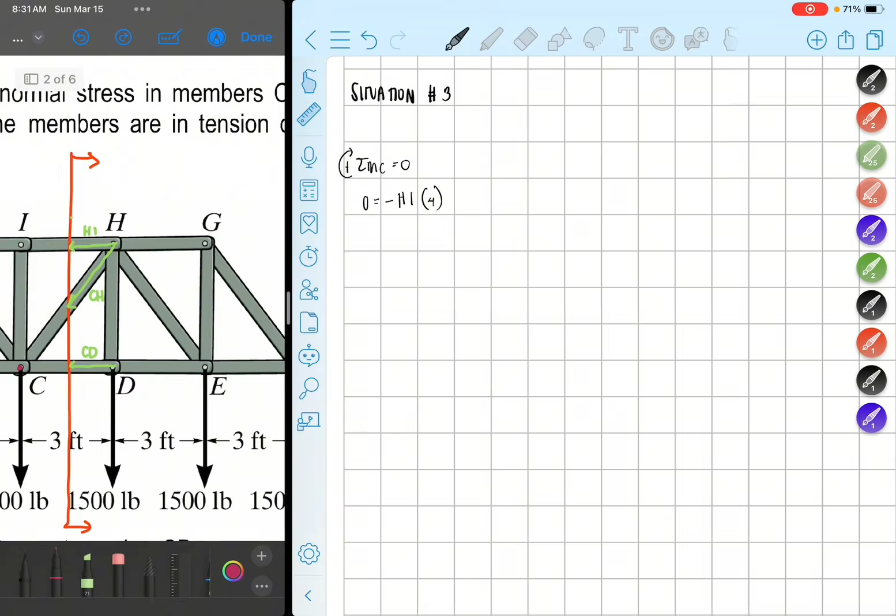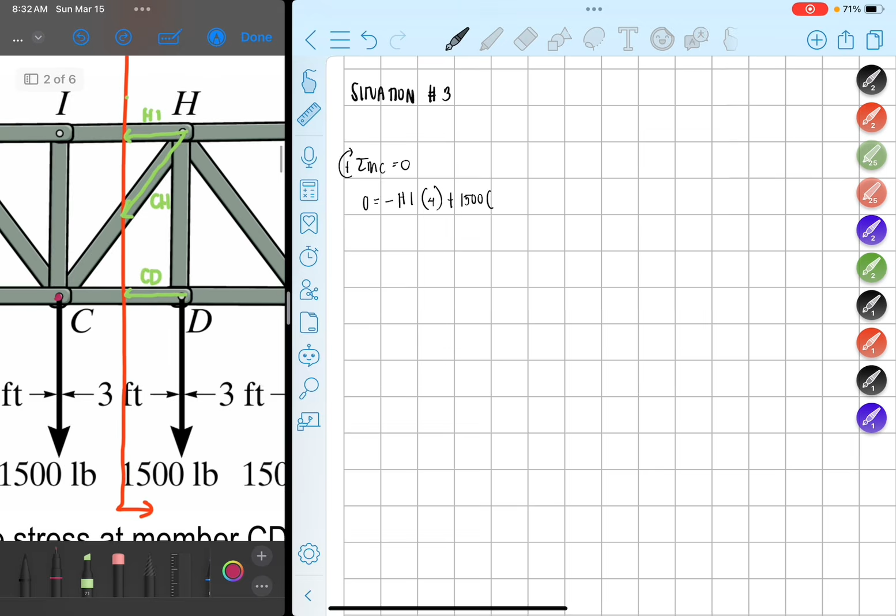At i-consider mo naman itong mga other forces natin na sa D, E, tsaka sa F. Kung titingnan mo, iikot naman ngayon ng clockwise yung tatlo na yan. So we have 1,500 plus 1,500 multiplied by ilan yung moment distance na nasa D. We have 3. Plus yung nasa E naman, we have 1,500, ilan yung perpendicular distance? 3 din. From C, you have 3 plus 3, you have 6.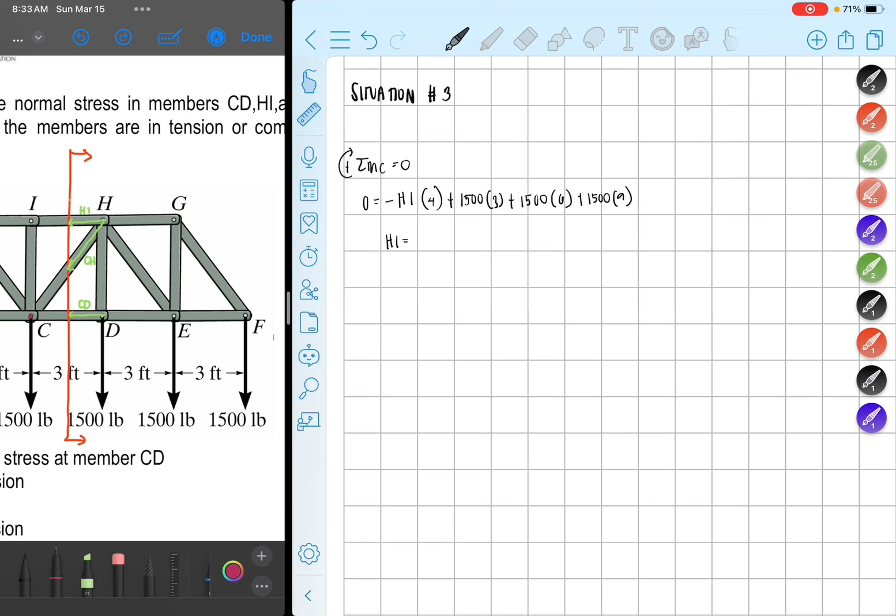At meron pa sa pinakadulo, yung 1,500 pa sa dulo, plus 1,500 multiplied by 9. Ayan, so makukuha natin si HI dito. Tama ba? We have 0 is equal to HI: negative HI times 4, plus 1,500 times 3, plus 1,500 times 6, plus 1,500 times 9. So lilitaw dyan na yung HI mo is 6,750. Ang magnitude nito is 6,750 pound.

At nag-positive yung sagot mo, di ba? Ibig sabihin, tama na tension siya. Pero wag mo nga munang ilagay kung tension or compression, mamaya mo na i-correct yan, okay? So that's for HI natin.

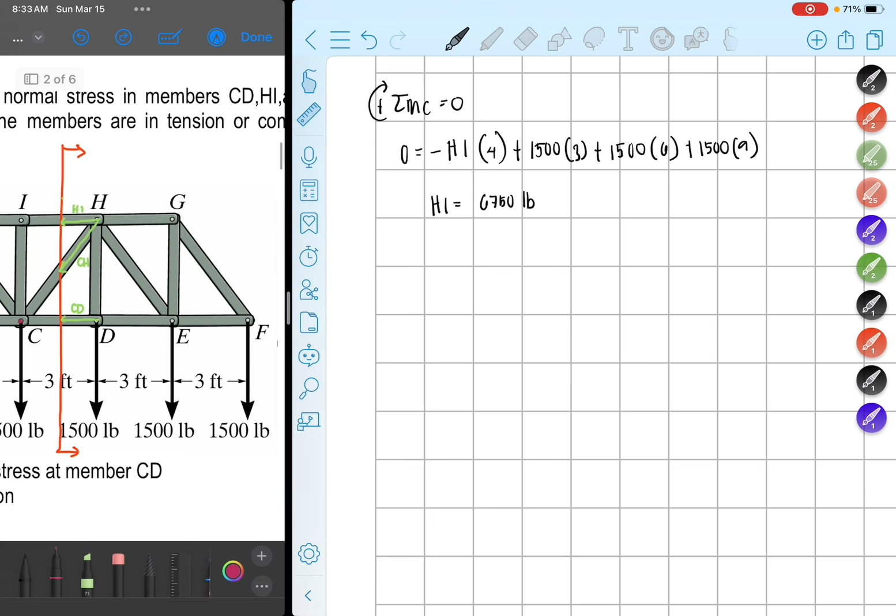Kunin muna natin lahat ng forces. Madali nila stress eh, stress hinahanap dyan, di ba? Force over area lang yun. Force medyo critical dito eh, so technically hanapin muna natin. So for HI, we have 6,750 pound. Ngayon, ano pa yung pwede natin kunin dyan?

Siguro mas mabuti kung mag-take naman tayo ng moment sa H. Pag nag-take tayo ng moment dito sa H, maka-cancel out naman si HI saka si CH. Ang lilitaw sa atin is si CD. So kung ganun, nag-take tayo ng moment at H, considering clockwise positive pa rin.

Considering clockwise positive. Summation ng moment at H equal to 0. So 0 is equal to CD, iikot ng clockwise yung CD natin, CD multiplied by 4, 4 yung height nun eh, 4 yung height ng member na to.

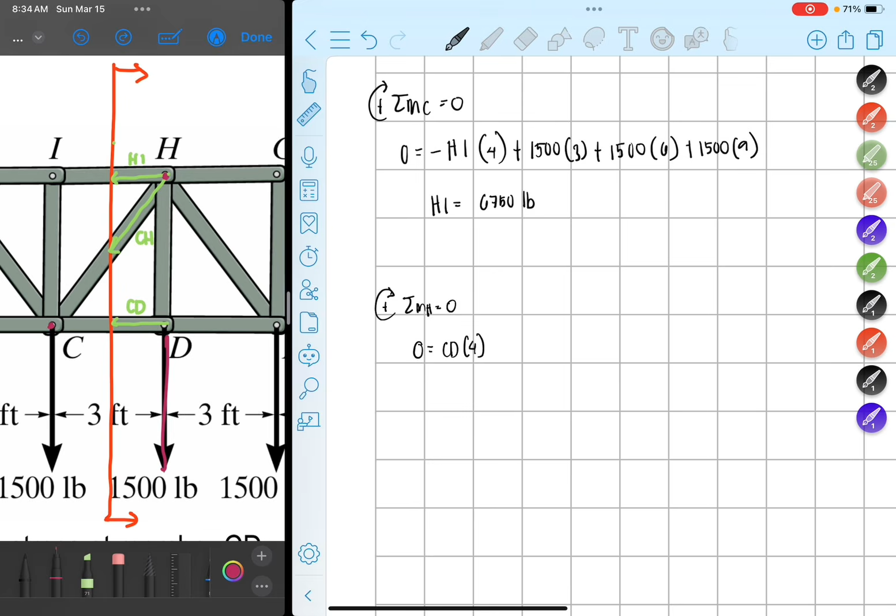At dun ka nag-take ng moment. Itong 1,500 na to sa D, pagka dito ka nag-take ng moment sa H, magkakaroon ba ng moment yan? Sabi nyo hindi, tama, ang galing nyo naman. Hindi kayo magkakaroon ng moment dyan dahil magka-pass through yan sa point of concurrency. Ibig sabihin, ang susunod na lang natin na force is etong 1,500 sa E at 1,500 sa F.

Since ikot to ng clockwise, so positive yan. Plus 1,500, ilan yung distance niya from H? Binibigay na yun, you have 3. Plus 1,500 multiplied by ilan?

Kung mapansin nyo, ang lilitaw ng sagot natin dito ay sinusolve ko pa rin kahit meron na akong solution para ma-double check ko ba kung meron akong pagkakamali. At least hindi kayo magkakamali.

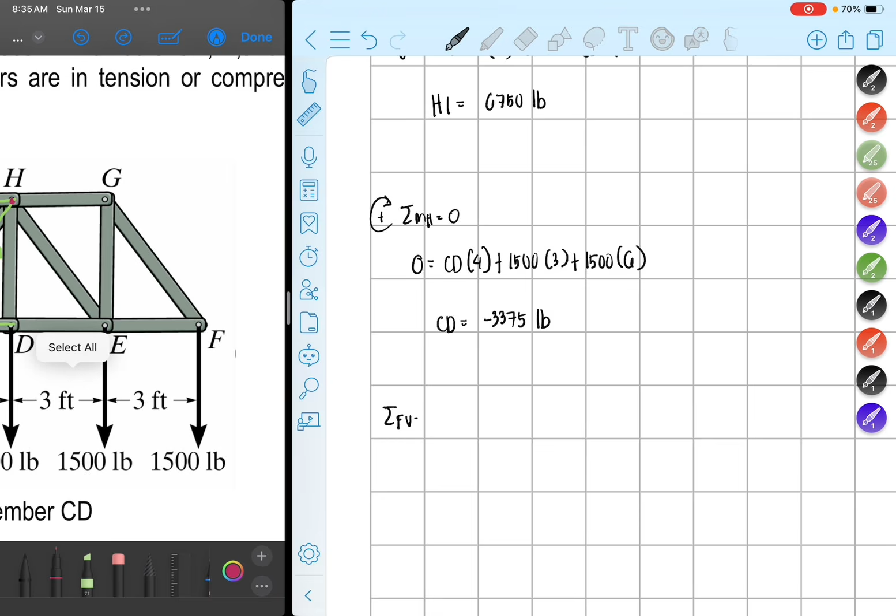So we have negative 3,375 pounds. Wag nyo munang itama, mamaya na lang. Meron ka ng CD saka HI, meron ka ng CD saka CH. I think the best way na pwede mo nang gawin is summation of forces vertical is equal to 0 para naman dun sa may CH mo. Kasi yung HI natin saka CD, hindi magagamit yan dahil along the horizontal yan.

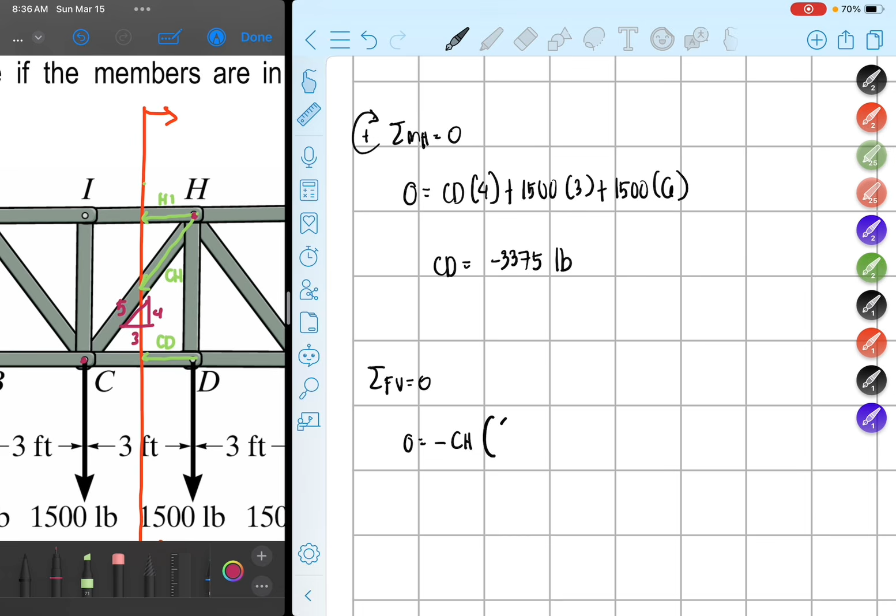So 0 is equal to negative CH. By the way, ano yung slope nito? Kung meron kang 3 na base, 4 na height, ano yung slope mo? Uy, favorite, 3, 4, 5. Okay, ibig sabihin, para makuha mo yung vertical niyan using the slope, this is simply CH, the vertical component over the slope. Tama ba?

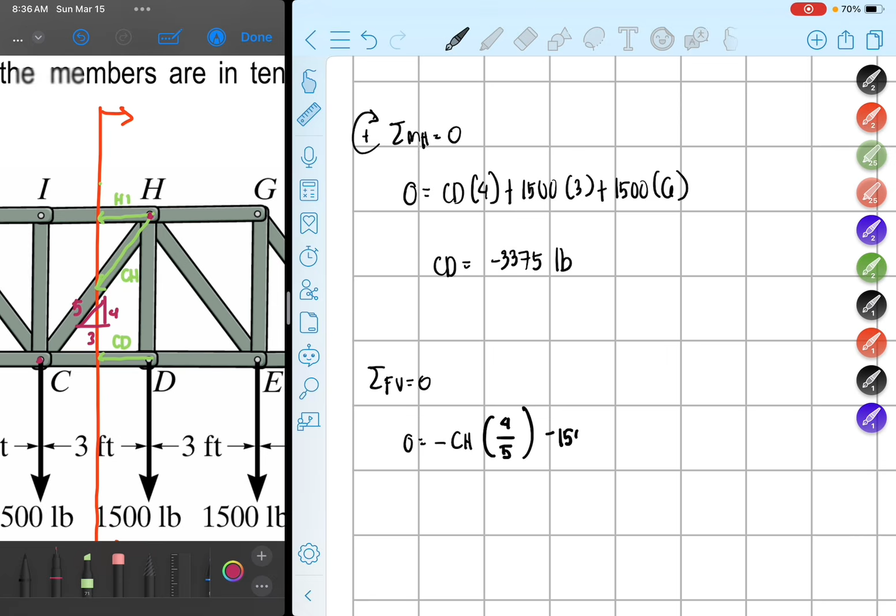Tama yan. Okay, minus 1.5. Malupit, nagbigay ng moment arm kahit na ano lang. Mali ka na agad nun. Tsabagay, di naman lilitaw yun. Minus 1.5, minus 1.5. So paano mo nalaman na tatlo lang yung kailangan natin?

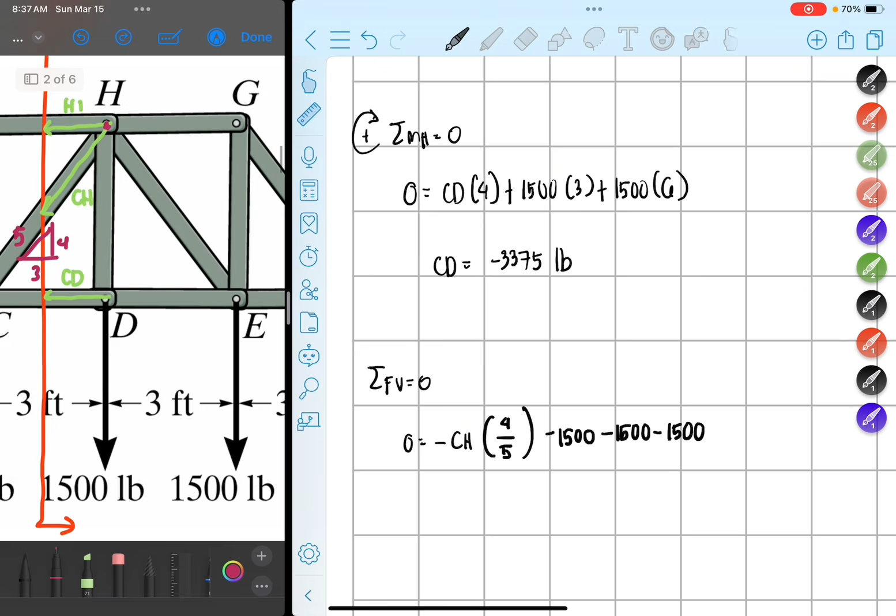Guys, yung base lang, yung mga forces, external forces lang, along the cutting plane yung i-consider mo. Sa lumabas ka kanina sa cut, nag-moment ka sa C. Guys, ang i-consider mo lang pag lumabas ka sa cut is yung dimension lang. Hindi mo isasama yung force na to. Yung dimension lang kailangan mo. Dito ka lang nag-take ng moment. Huwag mo isama yan. Kaya hindi yan ba? So ibig sabihin, along the cutting plane, within the cutting plane, yun lang ang consider mo. Kaya 3 1,500 lang yan.

Okay, so mangyayari dyan, we have 0, negative 15, minus 15, minus 15, minus CH times 4 over 5. Ang lilitaw dito guys is negative 5,625 for CH, is equal to negative 5,625 pounds.

So i-correct na natin. Okay, this is tension. This is 3,375 compression and 5,625... nalagyan ko ng ganun, or 5,625 compression. So using the formula for stress, solve na natin yun.

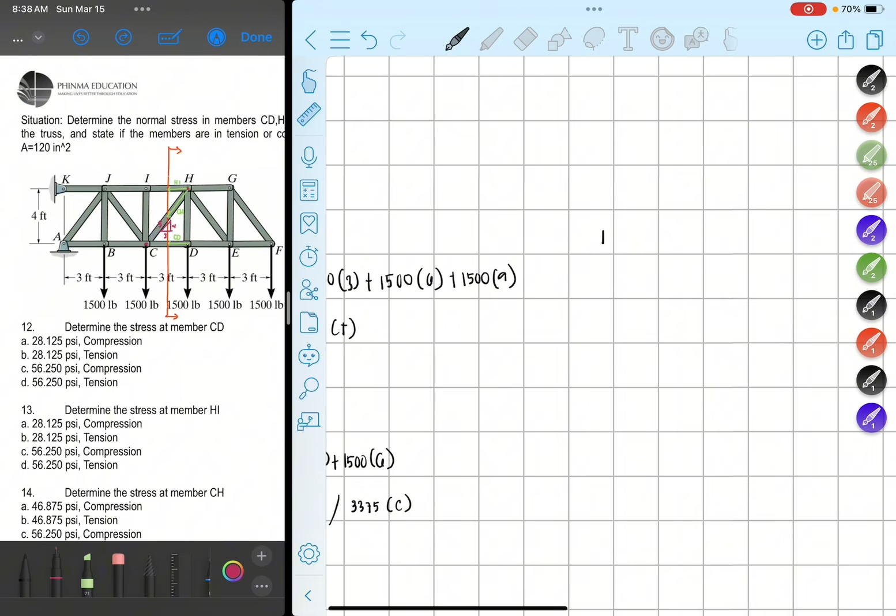For number 12, we have CD. Guys, ito pa pala isang tip. Kasi there are problems sa choices, kung ano yung, kumbaga, tulad na to. Napasin mo, 28, tinan mo yung 12, 13, 14. Pasin mo, yung 12 saka 13 magkamukha sila ng choices, di ba? Kung mapansin nyo guys, baka kasi mamaya, tingnan nyo ano man muna yung mag-isagot.

For number 12, you have stress ni CD is equal to... sino ba si CD? Stress ni CD muna. Ito pala sa baba yun, ito yun CD. We have 3,375 over 120. By the way, this is pound, this is inches square. So 3,375 over 120, so this is 28.125 PSI.

For number 13, stress ni HI. Kaya ang suggestion ko, wag per number yung pagbilog nyo. Pag yari nyo na yung situation, saka nyo i-locate kung asan ba yung sagot nyo. Kasi baka mamali kayo eh. For example, etong 28.12, teka lang, yung HI muna, sige. HI is 6,750 pound over 120. By the way, this is tension kasi... tama, mali, compression pala yan.

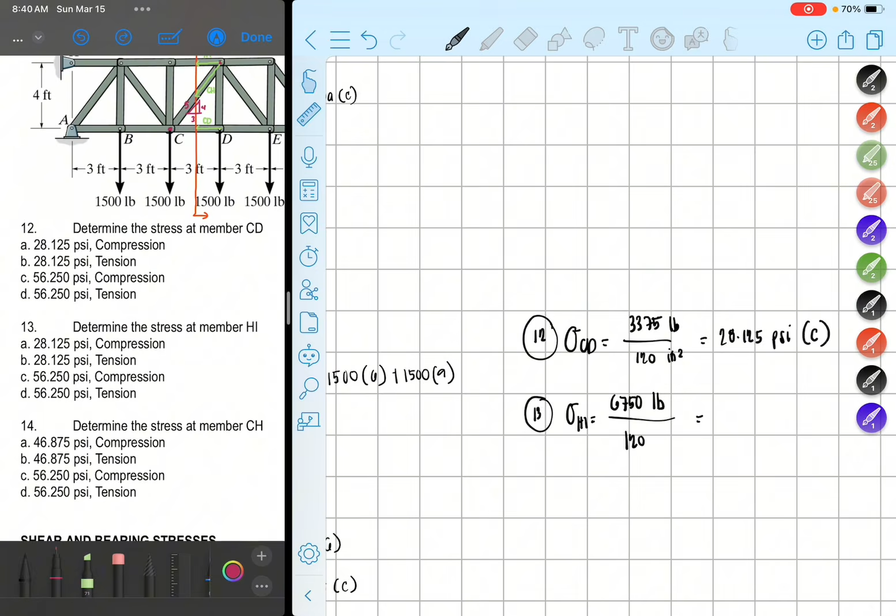CD is compression, tama, yes. Itong HI pala ang tension. So 6,750 divided by 120, this is 56.25 PSI tension. Mapansin nyo guys, yung choices sa 12 saka 13 magkamukha. Baka yung 13, yung HI, madala mo sa number 12 kasi andun din yung choice niya eh.

56.25 PSI. As for HI yun, hindi mo binabasa kung ano hinahanap. Determine the stress at member CD. Unahin mo to, bilugan. Okay, so 28.125 PSI compression, eto yun. Pag nabilugan mo na yan, proceed ka na sa HI. Ang HI mo naman is 56.25 tension. Meaning, ito naman yun. Tama ba?

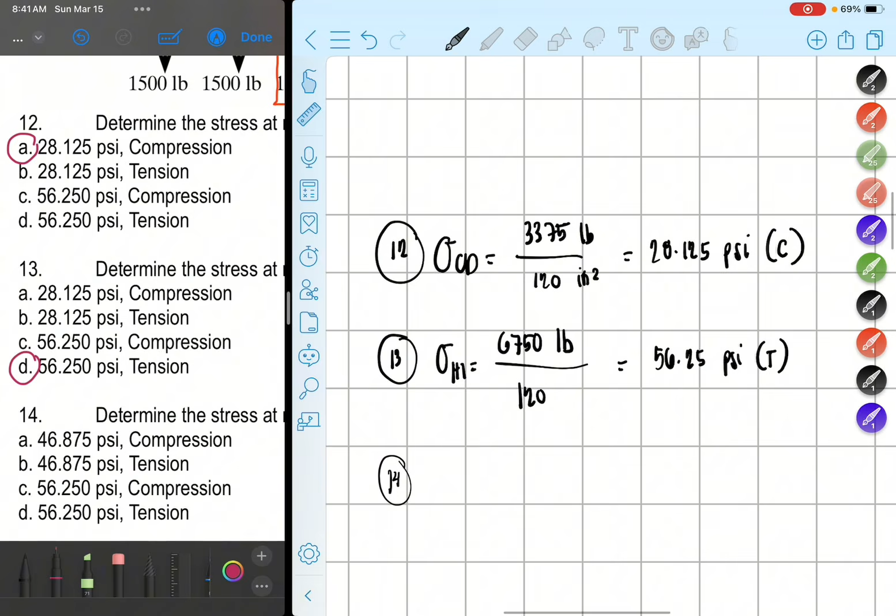And then for number 14, medyo okay na iba na naman eh. We have CH. Ilan ba yun? We have 5,625... 46.875. I think this is compression kasi nag-negative kanina yan. So eto ngayon yun.

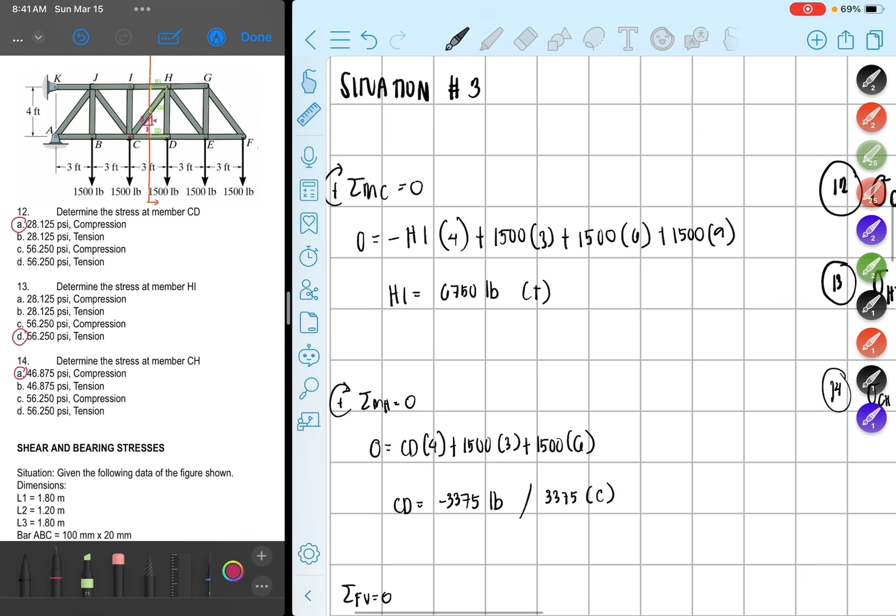46.875 compression, letter A. Tapos pag-ayari ka na, sabi sa'yo, i-recheck mo. For number 12, 28.125 PSI compression. For number 13, we have 56.25 PSI tension. And for number 14, we have 46.875 compression. Check mo dito: yung HI is tension, tama. Yung CD ay compression, tama. At yung CH ay compression, tama. So bago ka mag-proceed, at least sure ka na tama lahat ng sagot mo. So that's for our situation number 3.